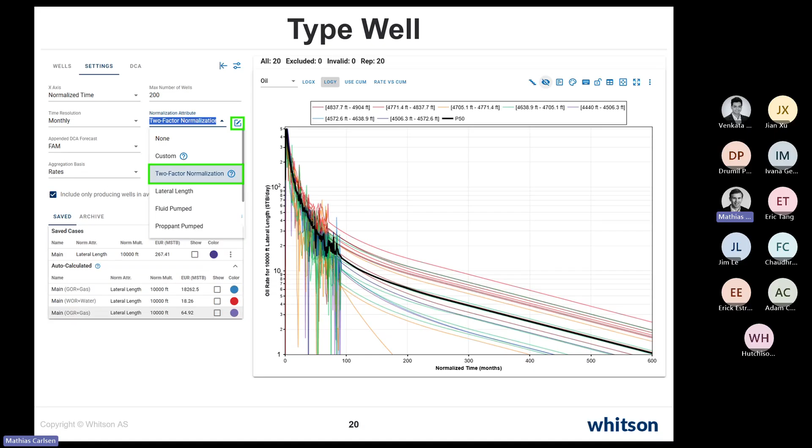And the priorities of the features are just literally, okay, 100 people wanted PNR DCA in the software, well, then that's going to be prioritized versus a thing that was requested by one person. Very simple. So over to some news. It's been a very, very big year for us. We've doubled the development team across all our products, actually. And on the Whitson Plus side of things, we've continued to enhance the features that all of you use and love today, whether it's type well or comparison plot.

Comparison plot is a great example of a feature that's probably 10 times better than last year, where you now can integrate a GIS plot. You can add forecasts from PNR DCA or regular DCA. You can do aggregation, averaging, etc. And now, as of late, also cross plots, bar charts, etc. Also on the newer front, we've added in basically merged GIS and filtering.

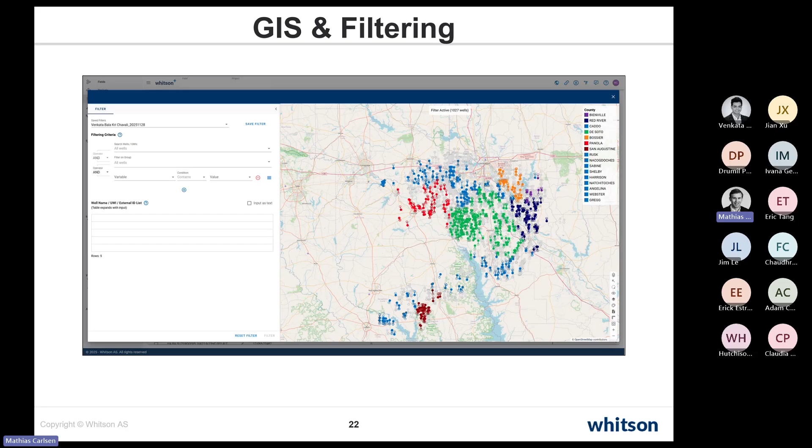There's kind of a joke in the software space that every software in North America starts with a map. I don't know if you guys have heard this, but people are very spatially aware, and a lot of the problems are kind of linked to things spatially. So to be able to filter on all kinds of parameters, whether that's well attributes or physical attributes or custom attributes, and also do that spatially, is something that we've doubled down on the last year.

Forecast Manager. It's so fun. If you haven't used it, take like 16 wells at a time there, and just spray gun fit the forecast with whatever you want to configure.

I'm trying to teach my 6-month-old son this. He's getting there, but he still needs to work on the setting.

But it's addictive. And associated with that, you can compare forecasts, statistics related to the forecast, and filter to forecasts that you're like, oh, these probably look a little suspicious. I compare the forecast from last quarter with these ones, and the EUR or cum 5 years are a little bit different. Let me double click and view those.

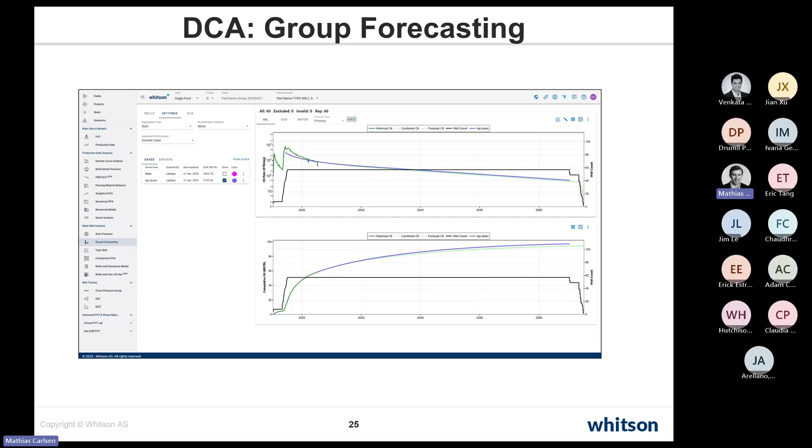Also, group forecasting. Some people don't like to individually forecast wells and then aggregate them, but just aggregate them at once and bulk forecast that one stream. Totally fine to do, and that also is a capability we've added into the product in the last few years.

I'm going to double click a little bit on something called PNR DCA. We had a webinar on it last year. Most popular webinar we ever had in terms of actually triggering feature requests. I had a list in my Excel sheet, and it counted over 350 people requesting to get that into the software. And then I was, okay, probably we should go in and get it into the product. And if you haven't heard about what it is before, I'm going to kind of dumb it down and teach you in a couple of seconds before I get Jennifer on the stage.

So what PNR DCA is, if you want a simple way to think about it, it's just pressure-normalized rate, so a secondary way to forecast your wells in addition to decline curves. It was popularized after this webinar that Oxy did, and it has actually been in the literature the last 10, 15 years, proposed by multiple different co-authors, and it's simply just accounting for flowing bottom hole pressures or normalizing your rates for that.

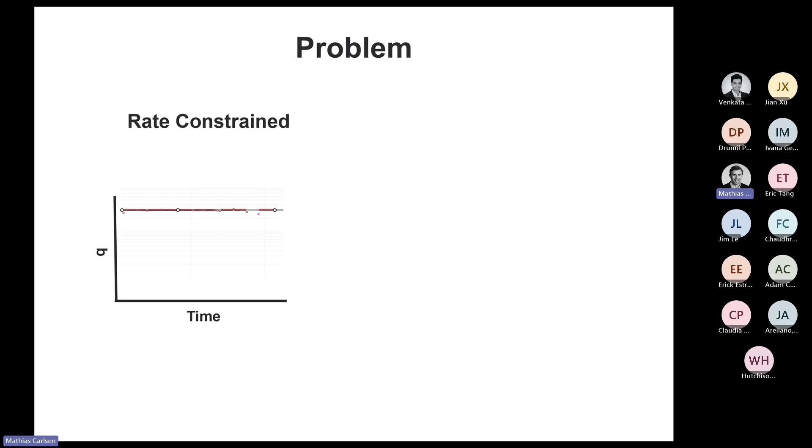So the problem, to address it very simply, let's say you have rate-constrained wells and you need to forecast, what do you do? And that's where PNR DCA comes into play. So you just combine your rates versus time and your delta P versus time.

You pressure normalize those rates and you multiply them in this case with like a fixed delta P, and you can plot that versus either time or versus cum, which is kind of the industry standard now, to get an early time EUR. And just to give you an example of a data set we got a couple of days ago, this is actually 16 days of flowback data, so it looks like a lot of data, but it's actually not many days. It has an inclining period and a flat period.

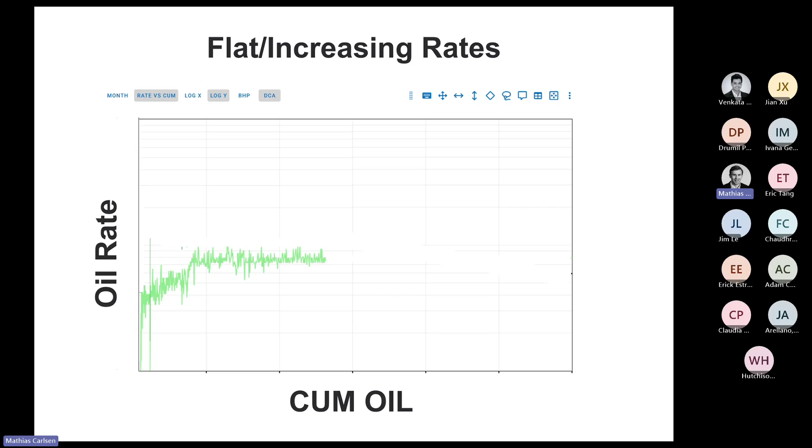If you went in here with unconstrained B factors, the best fit would be a B factor of 10. So that's a constant, it's a flat line. Okay, so you can't forecast this guy. With PNR DCA, you start to get the declining rates from day one, and an early way to go in and forecast your wells in those situations where that matters.

Okay, over at today's program, we're going to have a technical session. It's going to nerd out. We have a lot of petroleum engineering junkies in the room. I see you. You know, some of you were like looking at the equations at lunch. That was more fun than talking to your colleagues. I'm the same way. So hopefully, if we visit your office, or maybe if I visit your home at some point and I see that in the bedrooms of your children or something, then we reached our goal with the posters.

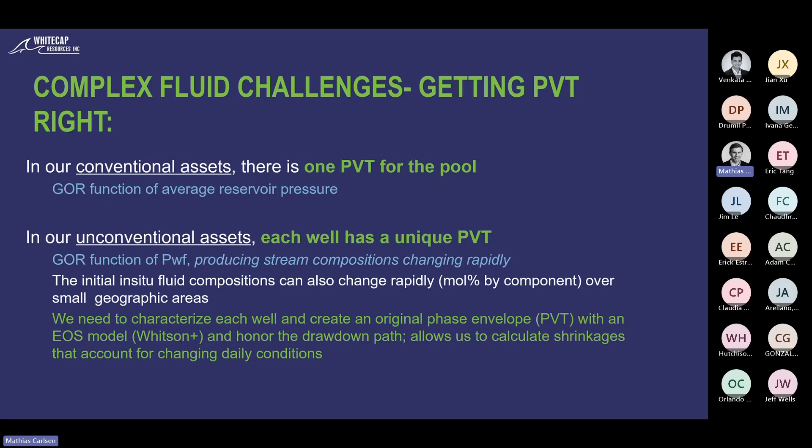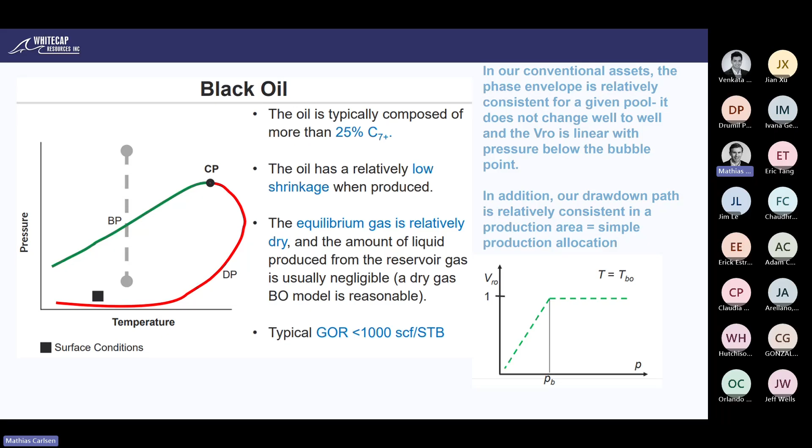So I'm not going to spend a lot of time with these. These are literally straight out of the Whitson training on PVT, but essentially just highlighting, black oil is pretty simple. And often when you've worked conventional assets, a lot of times they're pumped off very, very early time. So it's very simple in terms of trying to characterize and allocate production. When you get into your volatile oils, it becomes more critical to, again, correctly define that phase envelope so that you can get the correct bubble point pressure.

The drawdown path on these wells, because they're so big, often the drawdown paths can be different well to well or pad to pad. And then once you drop below that bubble point, you have a non-linear relationship between your volume of liquids and your pressure.

And then finally, you get into gas condensate, which is your most complex fluid system. And again, defining that dew point pressure properly is pretty critical, but you also have a phase of condensation and then flipping back into a vaporization phase. And this is where things get really crazy and you start to see these negative shrinkage values, which really make you scratch your head until you stop and really think about what's happening with your fluid system.

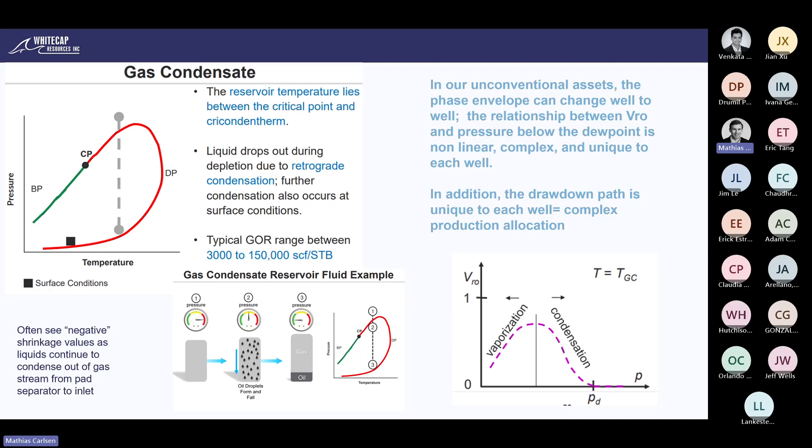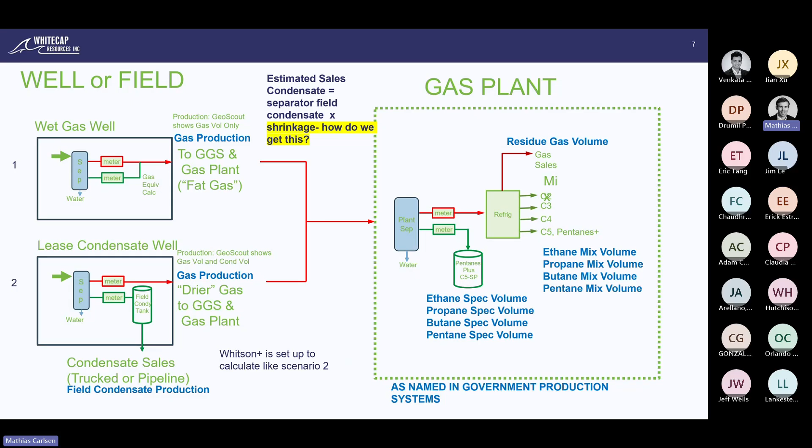So what are the key Whitson tools that you're going to need? So we went, like I said, down quite a rabbit hole and had a lot of help from Whitson trying to understand how to do this in the software. And ultimately, they created a few new exports and calculations for us as well.

But the very first thing, if you want to understand this better for your own wells, is you need to go into the compositional tracking and click on the settings there, and then you want to activate the advanced compositional run. This will give you additional calculations that you don't normally see in Whitson by default. And then the first export is related to understanding the shrinkage of the liquids that you actually have at the separator, so that field condensate component.

And Whitson is pretty cool in that it actually calculates daily. So if you've got your separator pressures and separator temperatures coming in daily, and your liquid rate off that separator, it's calculating based on the EOS what the shrinkage factor is daily based on the pressure and temperature that the separator is operating at that day. So right away, you're getting better resolution on your shrinkage than you would if you were just using one flat value.

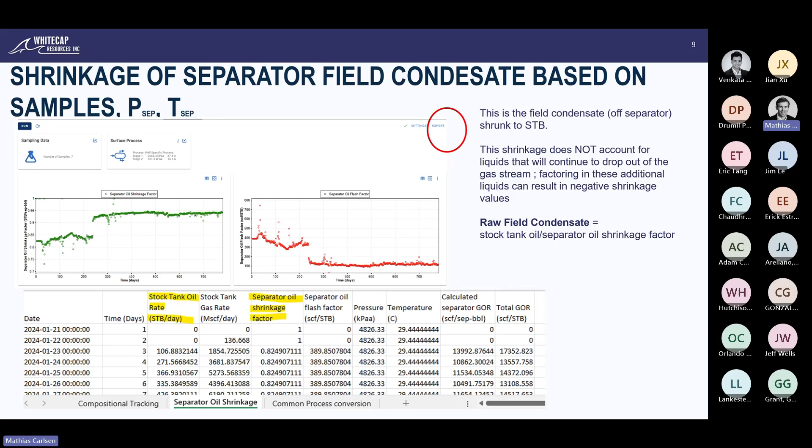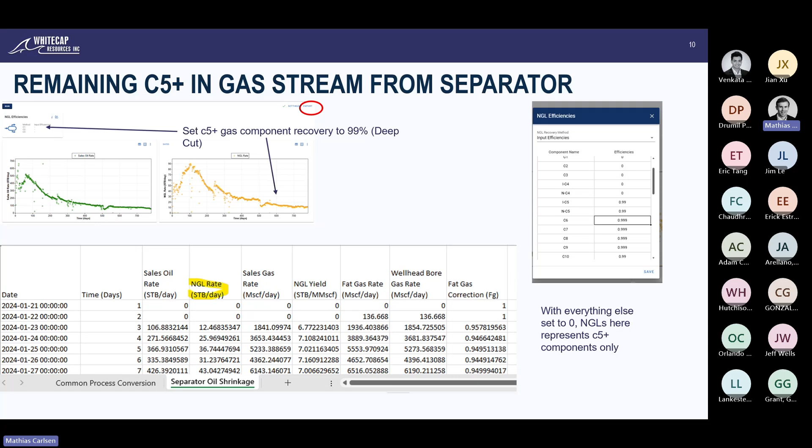And then you need to try to figure out how much liquid is remaining in that gas stream. So to do this, you look at the NGL tab, and you're going to set your NGL efficiencies to basically 99% for your C5 plus components. And so then Whitson again goes through, it uses the samples that you've provided, the pressure and the temperature, what already came out at the separator. And for that gas stream, it calculates the remaining C5 plus component that you should be seeing for that well.

And then as a final step, you need to add those two components together. So you're going to take your field condensate off your separator as a raw number. You're going to add in the C5 plus number, and now you have your total liquids, which you can calculate a shrinkage value from. So it requires a little bit of exporting and spreadsheet work, but you can get there.

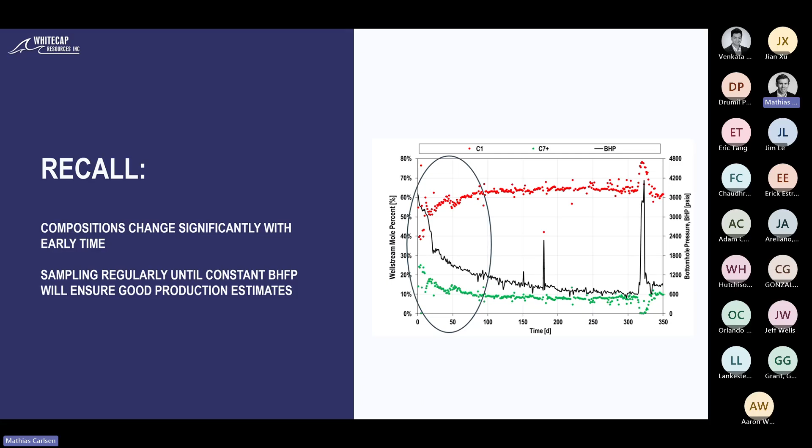The other thing we took a look at was just sampling frequency. So again, recalling that your compositions change very rapidly with early time, and then that can have a big impact on your shrinkage as well. We wanted to take a look at sampling frequency and how much that was actually impacting the production estimates. And so this is another example where we just compared the Whitson forecasts in this case, because we know there's a lot of error with how things are going into our production estimating system.

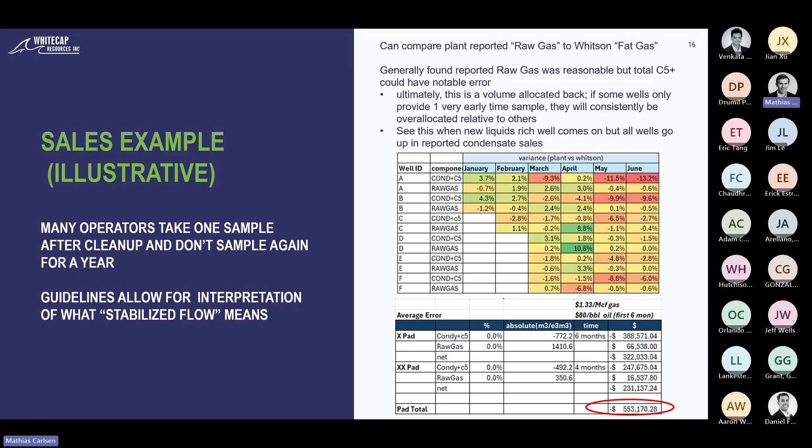And I think what really stands out here again, you want to tie this all back to value. For the 2 pads that we looked at over the course of 5 months on average, the net impact, and we did this for sales and gas, the net impact overall was about $500,000 lost.

So what are the takeaways from all of this? Number one, you have to correctly characterize your wells so that you can do proper shrinkage calculations, get proper well production numbers, and ultimately track and understand if you're getting the revenue stream that you should be from your wells. It's really important that you understand where your data is coming from, what the field processes are, and where the potential for error lies. Error can be introduced through infrequent sampling.

The measurement guidelines are pretty loose. They say that you have to sample until you reach stabilized flow, but there's no real definition of stabilized flow. For a lot of operators, that just means the well's not slugging by the end of the test. Not resampling when production conditions change is another one. When the field flips from a high pressure separator condition to a low pressure separator, that's again a trigger for a resample.

Group separation is obviously a bit of a problem because you lose resolution there as well. And ultimately, even when you do it all right, if other operators at your same plant inlet are not doing it correctly, you're going to have error. Action items we identified within our own organization include increasing sampling. What we do right now, which came through collaboration with Whitson, is we recommend sampling once per month for the first 3 months during the high drawdown phase, then once every 2 months for the next 9 months, and then once a year after that.

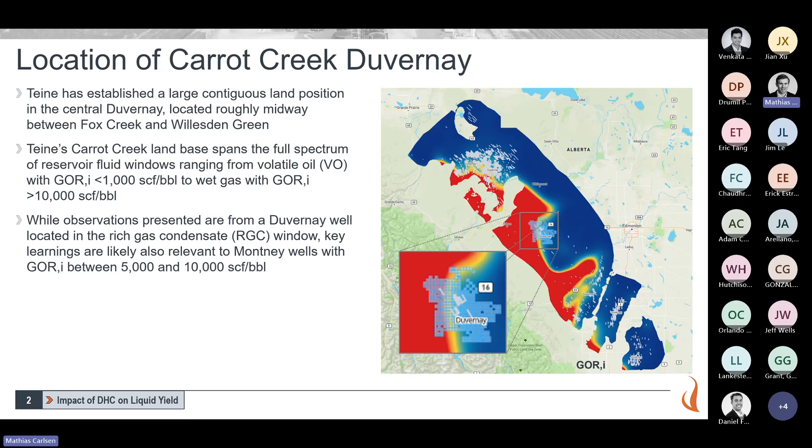And what I want to focus on is a well that's sort of in that 6,000 to 7,000 initial GOR. And I would think that the learnings that we've deduced from what's in this data set are probably also applicable to Montney wells. So maybe something for non-Duvernay operators in here too.

We started using downhole chokes on some of our wells early on just because of the very high pressure differential between wellhead and the separation facilities. Joule-Thomson effect is not a good thing to work with in the winter. And so just run a couple of downhole chokes, mitigate all those operability issues, and just take that cooling effect down at reservoir temperature rather than at ambient.

And so we were working on a step-out pad. So this is a single well. It's got its own dedicated separator by that extension. And so any of the changes we made were very much trackable at the sales terminal. There's no proration issues. There's no sampling issues. So this is very clean data. And I think that's the only reason why we caught this.

I'm going to get into this chart in a bit more detail on the next slide, but essentially my color coding throughout will be: red is the separator gas stream. The green are separator liquids. Black throughout is tubing pressure. The golden is casing pressure. Showing on the split graph below is my separator pressure in gray, and then my separation temperature in purple. And then that dashed line is essentially where things are starting to freeze off on us.

We initially ran into this well with an 18/64 downhole choke. We thought we were in the volatile oil window. It's a step out, got to equip it with something. And then found out, of course, it's a retrograde gas. So the completely oversized choke really didn't do anything. And I think that's important. We did pull that choke after about 8 months.

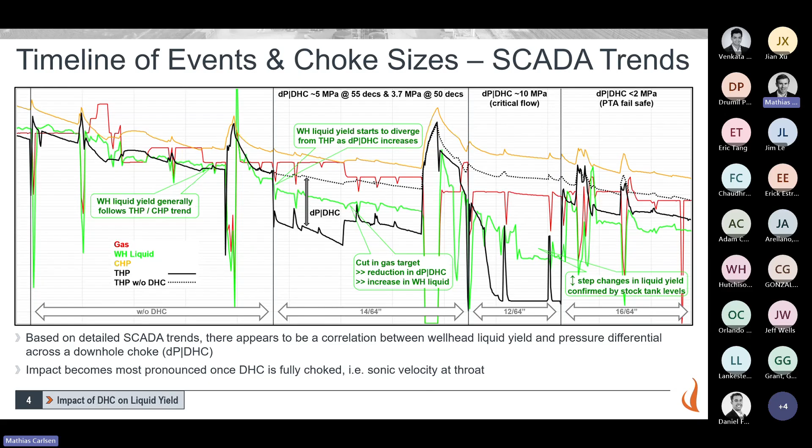Looking at the stock tank level, here's a type curve for this well. It's very well behaved. When there is sub 1 MPa pressure loss with that 18/64, your 7-day average on this well is trending slightly above type, slightly better above type once there's no pressure loss at all. So that goes along with that correlation. As we're starting to draw 3 to 5 MPa with the 14/64, we're starting to be more or less on type, so it's a negative impact. And then once we run the 12/64, the wheels kind of fall off the bus, right? And then we pull it, and then we're back onto trend.

Focusing just into that pink box here, the 2-week average leading into this was essentially 16.3 cubes a day of condensate at an average gas of 45 decs. During the period when that 12/64 was fully choked, we dropped to about 11.9 cubes at 44 decs, so a comparable gas rate, but about a 30% change in yield. And then conversely, once we pulled that choke, we increased to about 17.5. So it looks like when we're at sonic condition in that downhole choke, we lost or gained on the order of 30% of our wellhead liquid yield.

And that's very significant. This well is a ways down the depletion curve. We're talking about 35 barrels a day. If this happens while your well is making 100 cubes of oil, that's a very significant loss of income. And so the question really becomes, where did those liquids go?

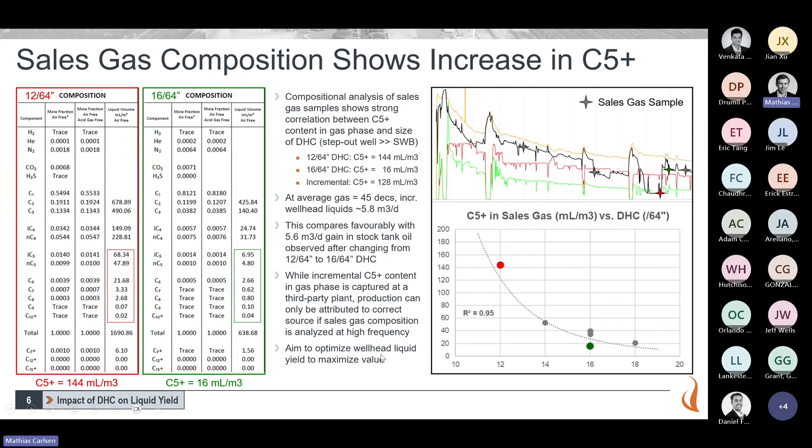Now, they were nice enough to actually agree with this presentation here and have credited us back in the meantime, but I think it goes back to you've got to really be on top of your gas wells because they will change radically if you at all approach sonic conditions on a choke. And so really, I think if you want to optimize your value, just keep your condensate on your tank, know what your downhole choke is doing.

And so at that point, I kind of took over to the Whitson side. First, what did Curtis think of this? So back in 2012, Curtis Whitson published a paper, and it demonstrates a very close correlation between the wellhead liquid yield, which he called OGR in his paper, and P well flowing, which is essentially this black curve here, but essentially black and blue are tracking each other. This is in a log time scale.

But the takeaway was, and this is a quote from the paper, the producing OGR tracks closely the FBHP, a fundamental characteristic of all liquid-rich shale wells we have studied. And so that dependence of wellhead liquid yield on FBHP is nothing new. This is well established, and our current example is no exception to that at all.

So what I'm showing here is essentially the flowing bottom hole pressure in black, that is Woldesemayat and Ghajar from Whitson, and then the measured bottom hole pressure for our gauges in gray until we pulled those. We ran a second set of gauges, so we pulled those again; the latest set of data I have is when we switched from the 12 to the 16. We still have gauges in the hole.

And so the OGR from actual tank sales very much overlays that correlation, right? Until we reach the point where we're at the 10-ish MPa differential, where we have essentially this unknown deviation from the trend. And so at 18.5 MPa, which was our confirmed flowing bottom hole pressure and also predicted, very good agreement there.

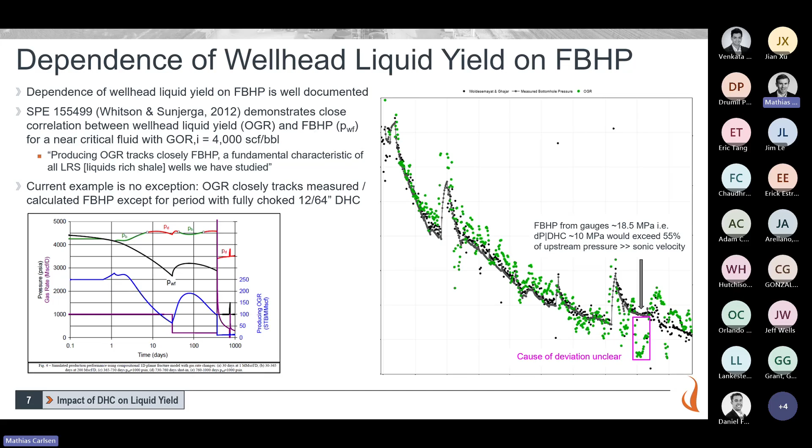I ballpark that dP DHC at about 10 MPa. It's probably more like 9.5 because 10 MPa would be, I think, 58% of the upstream pressure. You can't do that. At about 52 to 55%, depending on ideal gas and deviation from that, you go sonic. So it's confirmation, however, that we've got a sonic condition at the throat, and importantly, shock waves downstream of the throat. And we'll get to that in a second.

What does that mean? And so I've struggled with this for a long time. What is the dependence of wellhead liquid yield on PVT path? Because it's real. And so this is based on Core Lab's measurements of the PVT analysis that we've done on this well. This is the phase envelope they generated based on the tuned EOS.

And so we can kind of play this game where we say, okay, here's reservoir temperature, here's reservoir pressure, and we're taking this well down to where we had measured about an 18.5 MPa flowing bottom hole pressure. This is real. This is where we're sitting. And we then run a downhole choke, which takes something like 9.5 MPa downhole. It's pretty well isothermal because it's an unlimited heat sink down there. So the cooling effect doesn't really occur.

And after that, we're taking some amount of pressure loss on the way up the tubing to the separator. And essentially, it says that we will stay somewhere between the 15 and 20% liquid yield at all times.

If at that point we pull the downhole choke, we take that 9.5 MPa at surface across our wellhead choke, then we will obviously have our decrease in the pressure on the way up the tubing. We get into something like 45% liquid immediately upstream of the wellhead choke, and then we take that 10 MPa and it takes us back to the separator at the same condition. Why are they different?

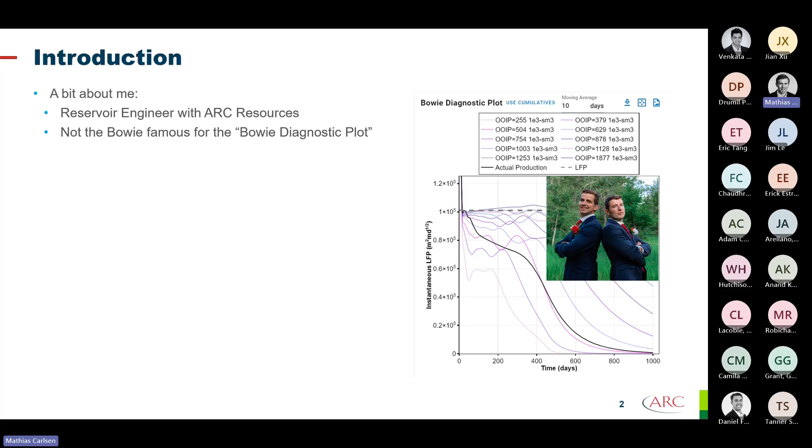A little bit about ARC. We're a Canadian oil and gas producer, almost exclusively producing from Montney assets, approximately 410,000 BOE per day of production. And a little bit about this presentation. I'm going to start with what is a PAS file, then how you can use PAS files in Whitson Plus, and finally why you might want to do that.

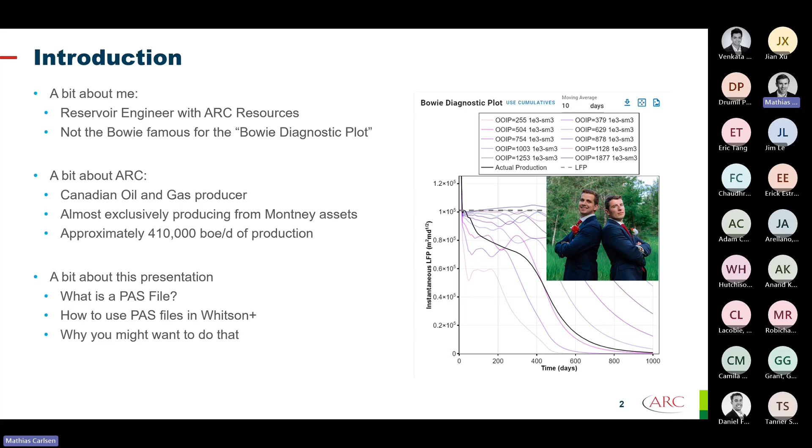So first off, what is a PAS file? PAS stands for Pressure ASCII Standard. So as you can tell, it's a file designed to store pressure data. It's an ASCII file, which means it's just text. You can open it up and read it. And it's a standard that's maintained by the Alberta Energy Regulator and the BC Energy Regulator.

There are many types of PAS file. There's GAN, OAN, and WAN files for gas analysis, oil analysis, water analysis. DST files for drill stem tests. GRDs store static and flowing gradient data.

Then you have TRGs for transient gauge data, such as buildups, AOFs, DFITs, etc. And then finally, you have PRD, which is production data, which is basically just for flow tests. And so right now, Whitson supports direct import of PRD PAS files. So that's what I'm going to be focusing on here.

And so you're probably thinking right now, why should I care about this text file format that the government mandates? How does this actually affect the work that I'm doing day to day? And so the convenient thing here is that because reporting your results in PAS format is mandatory, anytime you do a flow test, you need to be reporting that to the government in PAS format. That means that if you go into your well files, you've already got your flowback data formatted and ready to go. So there's no manipulation of your data, massaging it, getting the columns right to import into Whitson Plus. It is ready to go.

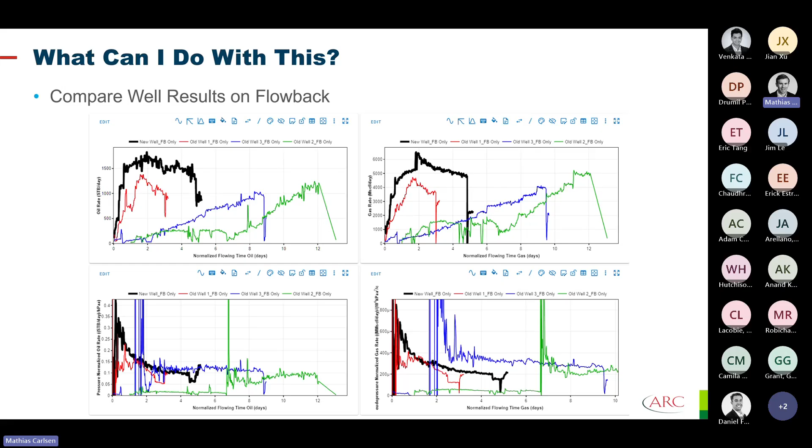Now you might be saying, I guess that's sort of interesting, but maybe we already have our flowback data in a unified, easy to query database that's already flowing directly into Whitson, so loading a PAS file easily doesn't help me. Or maybe you say, initial pressures are interesting, but we gather tons of DFITs, we do buildups all the time, we can estimate initial pressure on lots of our wells.

Or maybe you say, we don't focus on flowback data because our management is extremely patient. They understand when a new well is coming on, the long-term production is what matters. Looking at the first couple hours of a well is not indicating anything. So I say, especially to that last one, I am jealous if you're saying that.

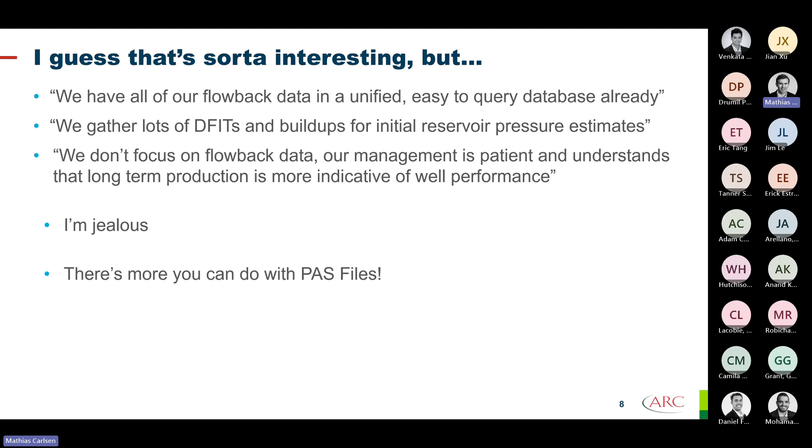But at this point, there's still a lot more you can do with these PAS files, because the best part, kind of given away by the title of the talk, is that all of this data is publicly available. This is not an internal proprietary data set. So say I've got ARC land in yellow here, and let's say Whitecap drills a pad right next to us. So I can go into GeoScout, and if I wait a couple months, I can open up the production.

Because of the sales volumes, I can see the gas and sales condensate volumes. I don't see pressures. That's pretty critical because we know that looking at rates alone without pressures doesn't really tell you much about a well. But I can also in GeoScout go in, look at the QFind documents, and boom, there's the PAS file. Just download that, upload it, and into Whitson.

The deviated survey, that's also public data. The casing design, that's public data. I can't see tubing, but during flowback, most wells are just flowing up casing. So I can calculate bottom hole pressure there. And now if I want to compare this against an adjacent ARC pad, say my manager's saying, Whitecap's doing something different, how is that affecting their wells? I can get an initial estimate here.

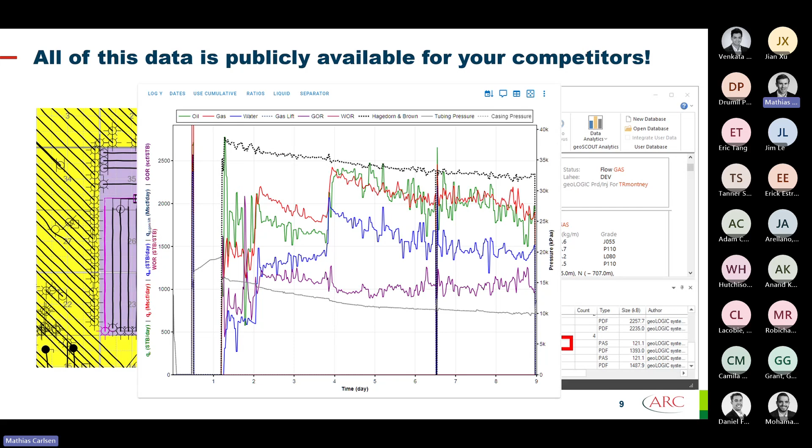It's only for the first week or so, but every once in a while you get someone who, for some reason, I'm sure there's good reasons for it, ends up flow testing a well for 2.5 months or something. And now I can download that data. This is a relevant well, upload it. I now have 2.5 months of hourly pressure and rate data. Now I get a chance to use my favorite diagnostic plot, plot it up, put my flat line on here. I can estimate an LFP.

Now I can directly compare that to our wells for more than just a week. And I can normalize that for tonnage, fluid, length, all that's public data in Canada too. So we can now really peek over the fence, really get an idea of what's going on with our competitors' wells.

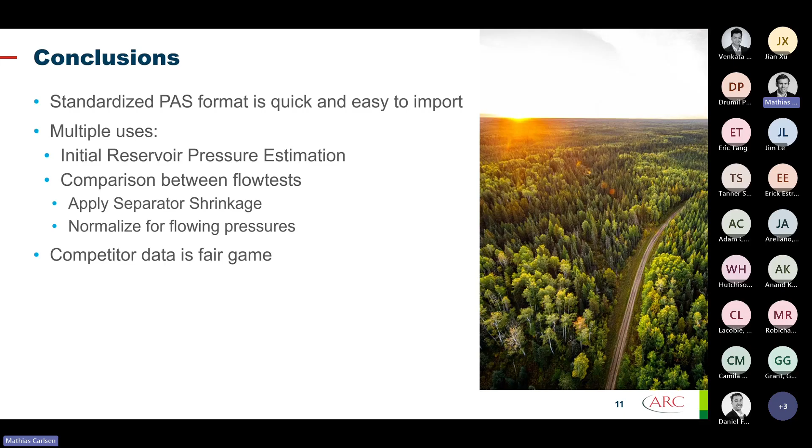So in conclusion, because of the standardized PAS format that the government requires us to submit all of our flow tests in, it's quick and easy to import into Whitson. There's a lot of different ways we can use this data. We can do initial reservoir pressure estimation, comparison between flow tests, accounting for separator shrinkage, and flowing pressure changes. And then all of the competitor data is fair game. This is not just for your wells, this is for everybody's wells. So just one more reason living in Canada is the best.

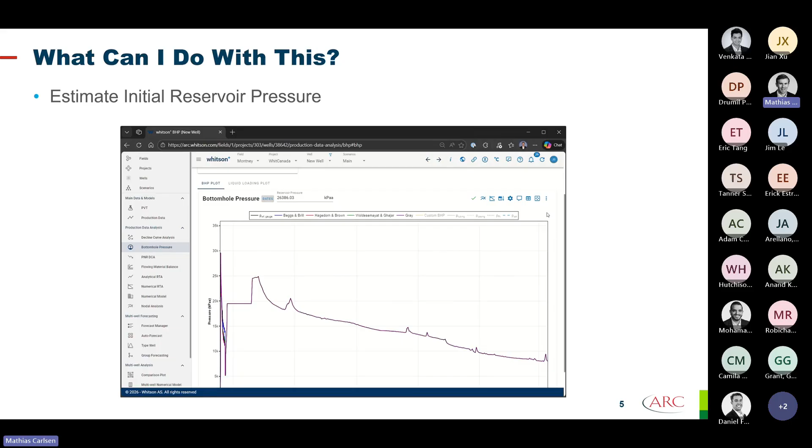Another question? Maybe we should try to move this guy around. Maybe people will come. Yeah. This is a shameless plug. Okay.

Dave Sorkamo with ARC. I think I was in Jordan's office and we were talking about this: wouldn't it be great to get PAS files into Whitson? So Jordan that afternoon sent off an email, and I think it was maybe within 5 days or less that, boom, we could upload PAS files. So I appreciate that. Oh, your beer.

Actually, question to Jordan while I walk over there for that question. Is there any of those other standard formats that would be valuable for us to support, or are they just not as interesting? So I would definitely like the ability to drop in the GAN, OAN, and WAN files, because we have our initial samples right now. Generally, there's all the different ways to initialize your PVT. We usually tend to do just GOR and API because it's simple, and because maybe that's a point-in-time sample, it's hard to say how representative that is.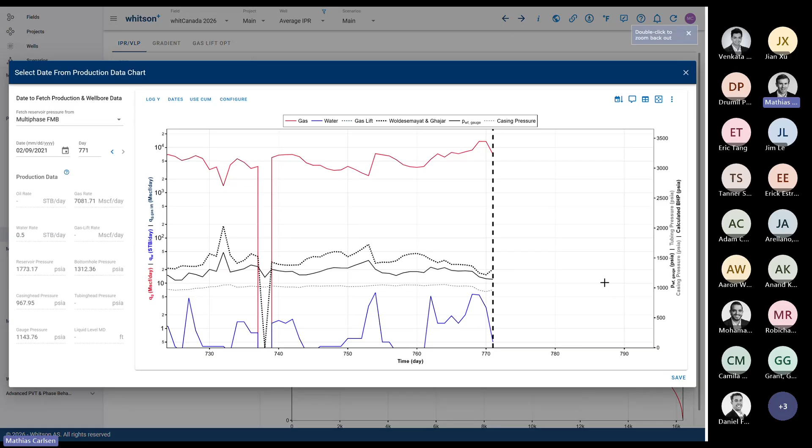Okay, so one of the things is this idea called average IPR. When we create a snapshot of the well's rate and pressure today, we can recreate those conditions. But is today's rate and today's drawdown really representative of the well's typical performance? Because we're just sampling the most recent day, and if the well is having a great day or a bad day, it could really misrepresent the well's productivity.

And so one of the ways we deal with that is we say, well, let's show what the most recent 10 days of rate and pressure look like, because if you picked the best day in the last 10 days, you get this really optimistic IPR. If you pick the worst day, you get this kind of bad IPR. So this is exposing the danger of just picking one day to represent the well's productivity, and the range of what those IPRs could ultimately look like. And this could really over or underestimate the response if you change the drawdown on the well.

So the way we've tried to solve this for you is to say, okay, give me my average IPR. And this will do exactly that. And you can change which period you want to sample it over here, right? Create the average among a few different points. So what this really means for you is you're going to get a more representative IPR, even if the well rates are jumping around.

Now, if you happen to have a bunch of wells and you want to do that in a bulk mode, you can go ahead and create an average IPR for all my wells, and pick over what time period you want it to make the average from. So ultimately, this is really just to make your IPR more reliable and more representative of the well's productivity, all right? The next thing is this whole idea of bulk running sensitivity.

So if you have a bunch of wells and you say, what would happen if I lowered the well pressure by 100 pounds on all the wells? Or if I increased the gas lift rate by 100,000 cubic feet per day on all the wells? To do that manually with different VLPs would be quite a time-consuming process. So with this bulk run idea, you can say, okay, I want to lower my wellhead pressure by 100 psi, and I want to make it a nice color for the VLP.

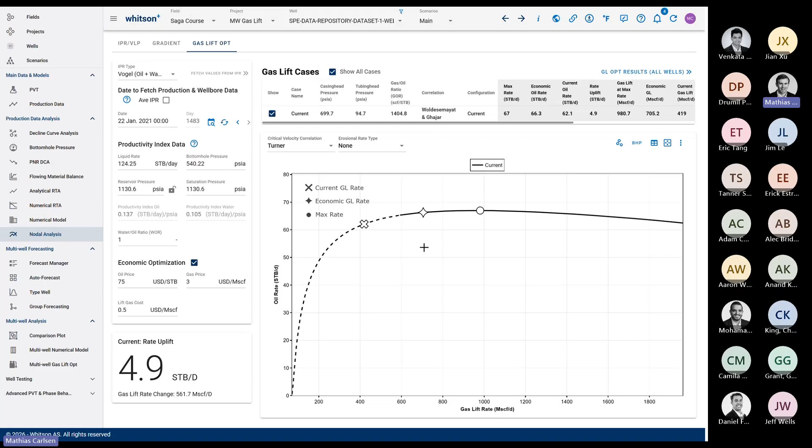Now, once you've done a bunch of gas lift curves for all your wells, you may want to start ranking them: which well is going to be the most responsive to a gas lift rate change. If anyone uses these results, you might have used it for reporting which wells are liquid loaded, right? But you can also start reporting which wells are going to respond the most to a gas lift rate change. These are the current oil rates the wells are producing at and the current amount of gas lift they're receiving. But what we really want to show is the uplift that we can get.

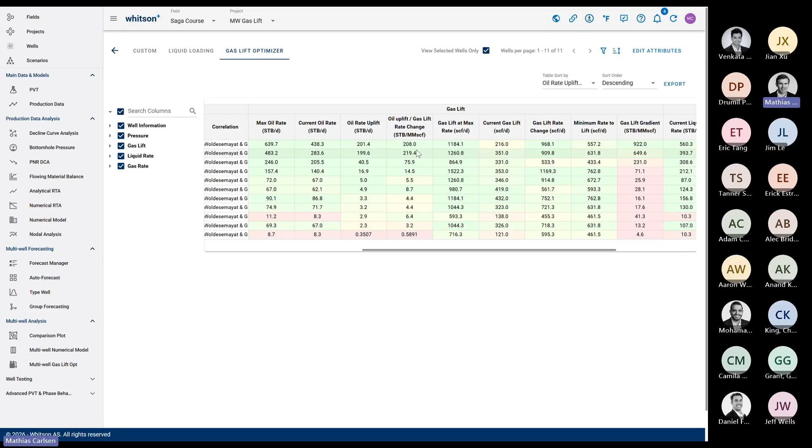So let's see, oil rate uplift. This is basically showing that the well's currently at 400 barrels a day, but we could increase it by 200 barrels per day if we went to the peak of that gas lift curve for that particular well, and how much extra gas lift we would need to inject to see an extra 200 barrels a day. So really, this is just ranking the wells based on how much reservoir rate response they could get. Some wells have very low opportunity. Some wells have higher opportunity.

Now, this is assuming you have infinite gas supply to add more lift to all the wells. But the next thing we would want to do is to say, how do we distribute a limited supply of gas lift? When we have many wells that share a common gas lift supply, I want to know how to best distribute the gas lift for the highest liquid rate. This came in about a year ago, and the whole idea is you pick a group of wells that are sharing a gas lift supply. In this case, they have 3.4 million of gas lift to share among multiple wells. And we say, tell me how to distribute that gas lift.

What we're seeing is that the current oil rate these wells are producing, when you add it all together, is about 1,400 barrels a day. These wells are getting 3.3 million cubic feet of gas lift today, and this is how much each well is getting. But what if we redistributed how much gas lift those wells are getting, honoring the total supply that's available? So for this well, we're injecting 216. If we went up to 600, this particular well would see a 160 barrel a day rate response.

Now, because we have to keep the total supply of gas lift the same, some of these wells are actually going to see a reduced rate, because we have to take some of their gas and give it to wells that are going to respond better to it. So ultimately, this is really just this multi-well gas lift distribution. Now, a few companies have really taken this very far in the last year, where they are using weekly data, the field conditions, bringing it in here, and assigning the optimized gas lift rates out to the field to keep all the wells in their sweet spot.

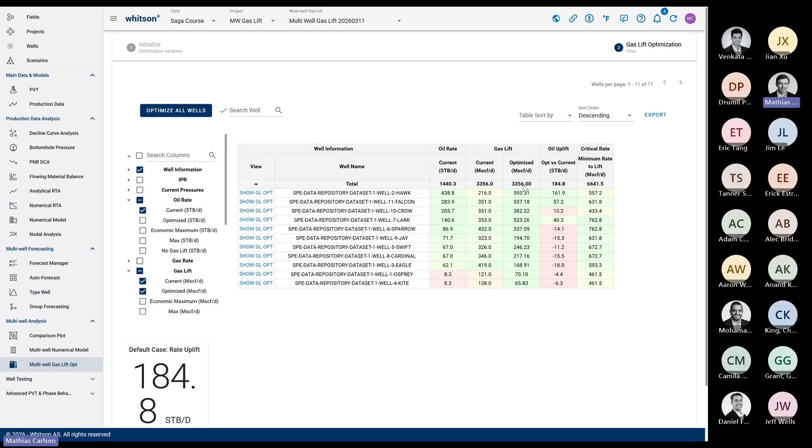And so we're even writing a paper with Devin this year for URTeC. So I'm sure we're going to have a WhitCon or some webinars about them utilizing this. I think for gas lift people, this is solving a lot of problems where you have to manually do this iteration, and it's pretty painful. So this has been one of the big changes in the last year.

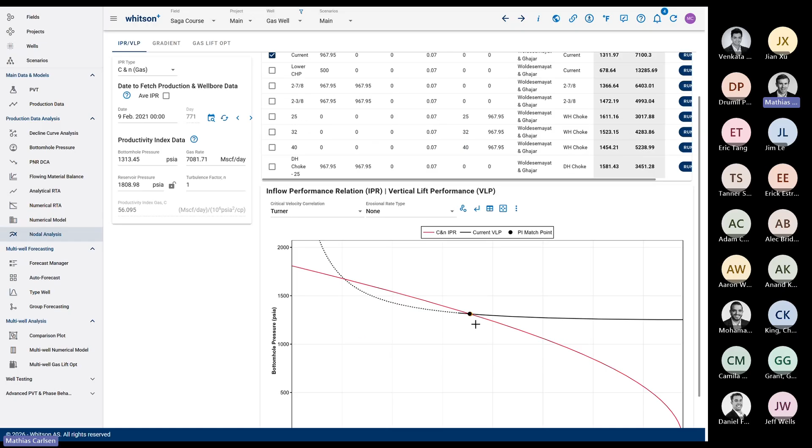Okay, chokes. All right, we had a good choke talk earlier today. So again, a lot of people don't know you can do this in Whitson. So this is a well that's flowing up casing, and if we installed some 2 7/8 inch tubing, we're going to get a little bit of friction. We're going to back out the well a little bit, but we delay liquid loading.

Now, what if we installed a large wellhead choke? Okay, 40/64ths, a smaller choke, a smaller choke. So these are all wellhead chokes to try to plan to see what the rate's going to be. Or what if we put a 25/64ths wellhead choke in versus a downhole choke? So you can start to compare wellhead choke versus downhole choke. What will that mean for your rate?

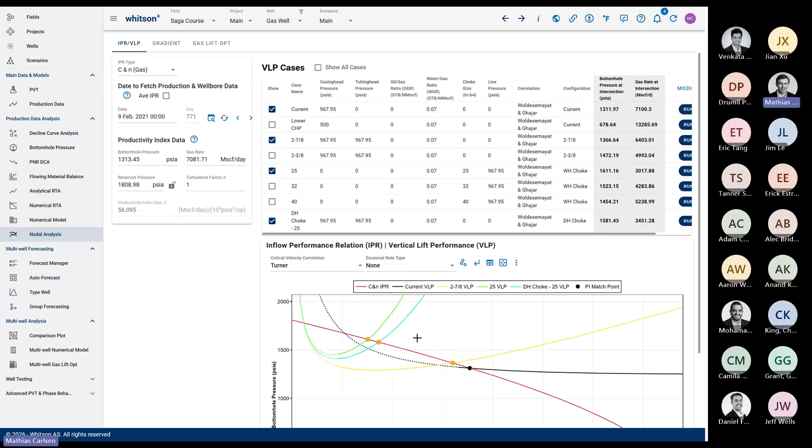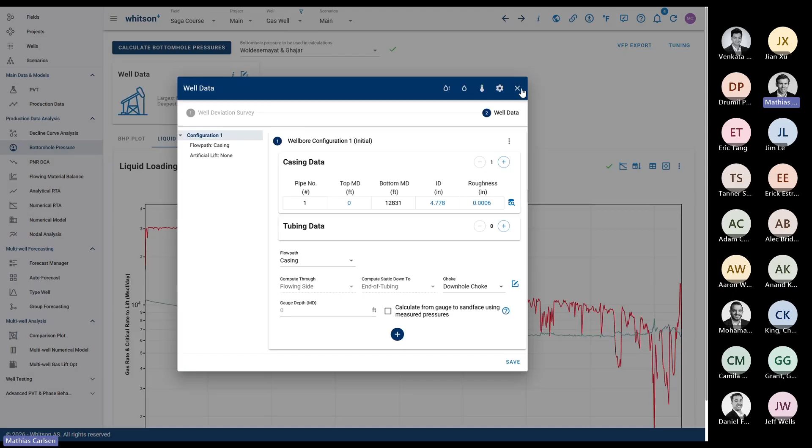All right. Now with downhole chokes, they've historically been a bit of a problem because if you have a packer in the well, how do you calculate the daily bottom hole pressure with a downhole choke? It's really tough. And so that's something you can actually do right now. So when you're describing your historical wellbore, you can say what size the downhole choke was through time, and ultimately take your tubing pressure through the choke to get the bottom hole flowing pressure. So even for downhole choke wells, this is a big deal. It's kind of a pain point I had in my past career trying to get those bottom hole pressures with downhole chokes.

Does anyone use jet pump here? No? All right, we'll skip that.

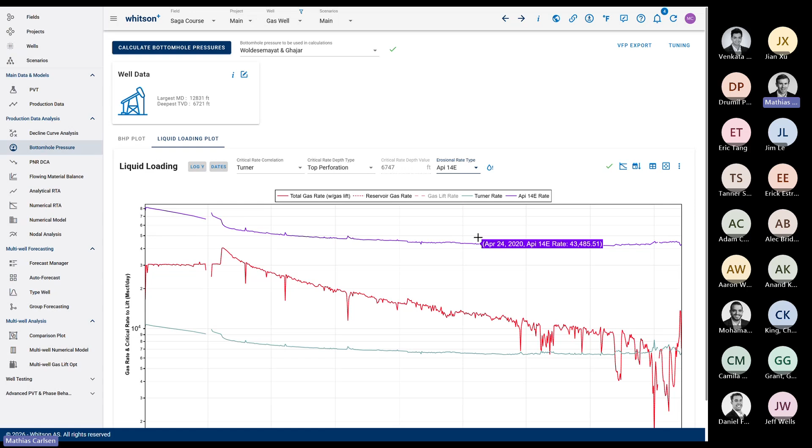So, erosion, this is a good problem to have, is that you've got such a high rate well, you have to worry about erosional issues. And so what you can do now is basically the red rate is the actual gas rate. This is our Turner or Coleman liquid loading rate that we need. But now you can also see what your erosional rate is, and if you've exceeded it, if you're getting close to it. So this is again a big deal if you just want to do some quick checks about if you're getting close to that erosional rate for your well.

Okay, plunger lift or GAPL and things like this. So part of the issue with plunger lift is it's intermittent, and the well's not always flowing. And so how do you calculate the bottom hole pressure for a well where you have a plunger in the well? So what we do now is you can put in how long the well is open during a cycle, how long it's shut in, and how long it takes for the plunger to travel. So what this does is it takes the cumulative production for the day, and it tries to convert it into the instantaneous rate during the plunger's rise cycle.

And so again, we think while the plunger is rising, that's the closest thing that we have to natural flow for the well. So we take those conditions and that instantaneous rate to calculate the historical bottom hole flowing pressure. So this isn't really here to optimize your plunger lift plan. It's really just to get a better bottom hole flowing pressure for wells that are on plunger lift, okay, or GAPL.

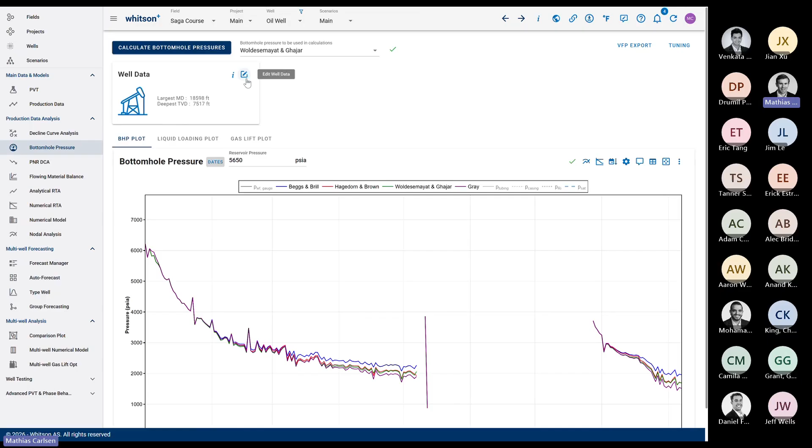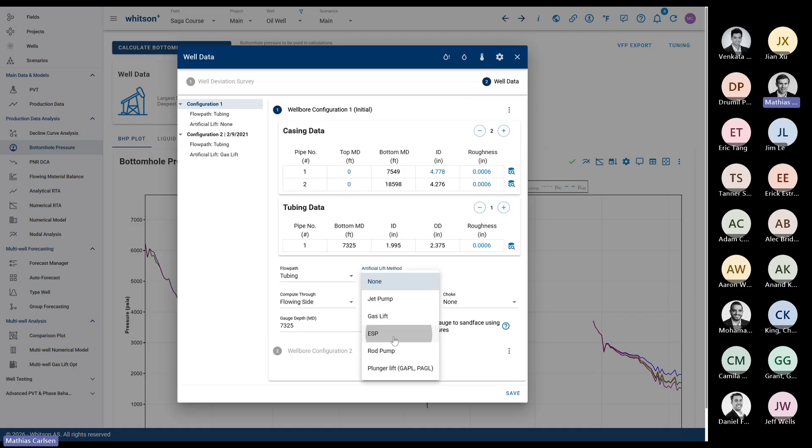ESPs, okay. So most people who have ESPs have a pressure sensor on the pump inlet, right? But for people who don't have that, it can be nice if you could calculate the pressure through the ESP. And what we've added is about 600 different ESP models in here now. So if you pick your ESP model, you can put a couple details about the ESP in here, and it'll basically use the surface pressure, calculate through the ESP to get the bottom hole flowing pressure.

So this is useful for two reasons: getting the bottom hole flowing pressure when you don't have a gauge at the bottom of the ESP, or if you're considering changing your ESP to a different model, you can pick it here and see how that new rate would be on your IPR curve. Okay, so this has been pretty handy for people who do ESPs.

I think we went through those really quickly here, but again, all of these developments are really from you, and hopefully it's kind of been like the flashlight moment where, oh, okay, I don't need that flashlight app on my phone anymore, right?

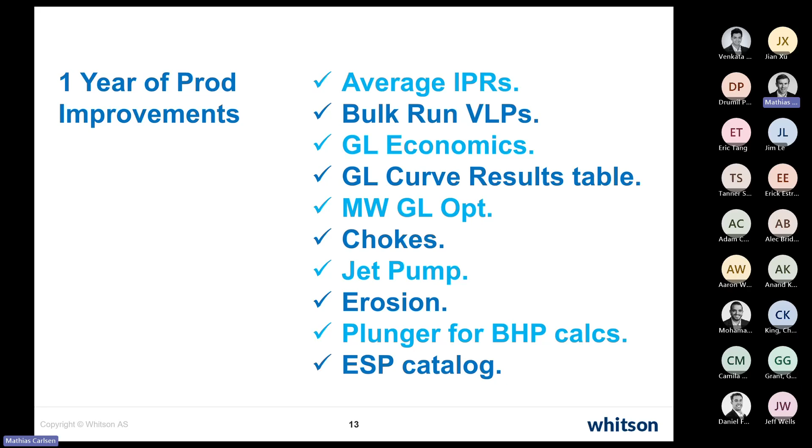There's something that's actually built into my iPhone, or in this case, Whitson. Mathias said we hired a lot of people in the last year, and a lot of them are software developers. Now you might be saying, okay, what's coming next? Okay, fine, I'll show you.

So one of the difficult things with production engineering is these IPRs. They're just a moment in time, right? They're a snapshot of today. And if we're going to do some sort of change with our wellbore, we want to know what is the 6-month cumulative improvement or the 1-year cum going to be from that wellbore change.

Okay, that's something that's historically required a really complex numerical model. I need to make a numerical model to predict that, and we're trying to come up with a way that's a lot more efficient and approachable for production engineers, because I don't really know many production engineers who want to mess around with rel perm curves and all this stuff, right?

So one of the ideas that we're working on right now is kind of a physics and empirical way to predict future productivity of the well. And so there's 2 steps. On the material balance side, we're going to define the size of the reservoir or size of the tank. And that can either come from your flowing material balance or just a volumetric tank size, right? You can choose how you want to define the tank size.

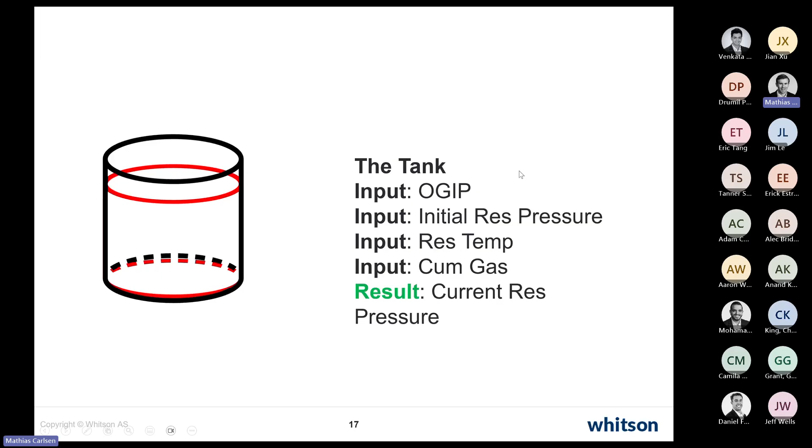We say how much has the well cumed so far, and that will estimate what the current reservoir pressure is for the well, right? So original fluids in place minus the cum, we get our current reservoir pressure. So we take that current reservoir pressure, and the way we represent the well's productivity is saying what's the current drawdown, the current rate. That's like a snapshot of today.

And so we basically create an IPR VLP curve for how the well is operating today using the current reservoir pressure. So the idea here is we're going to forecast the well for 1 month at this rate. After 1 month of production, we can subtract what that cum would be at this rate, and watch the red line. We can calculate the new lower reservoir pressure with 1 month at that rate, right? Just material balance, how much have we cumed at that rate? So now we have a new reservoir pressure and we have a new operating point.

So this is just the material balance topic, but this will let us produce a rate forecast for the well. And the cool thing about this is it's a pressure sensitive decline. So if you decide to schedule any sort of wellbore change, drawdown change, artificial lift change, we're going to predict what the rate response is as part of this forecast, because there's an IPR in the background of all this and a material balance tank. So that's really solving one problem, just the material balance part of it.

But you're thinking, well, Graham, I don't have boundary dominated flow. And these IPRs, if you want to assume a constant productivity, that's really only true in boundary dominated flow. So when we have these long transient flows, we need to tackle the topic of the shape of the IPR changing as the well's transient continues, as the productivity keeps changing. And so who here uses PNR, or has dabbled in pressure normalized rate a little bit? Okay. So PNR is kind of like a version of productivity through time.

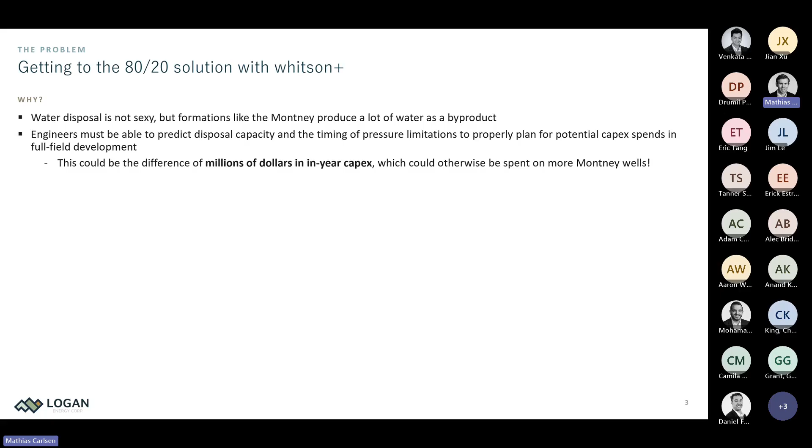So how do you do this with limited time and human resources? At Logan, we're a small company, so we don't have access to expensive software, we don't have access to full-blown 3D reservoir simulators, and we want to come up with quick and actionable decisions. There's so much to do, so we want to come up with something quick and simple.

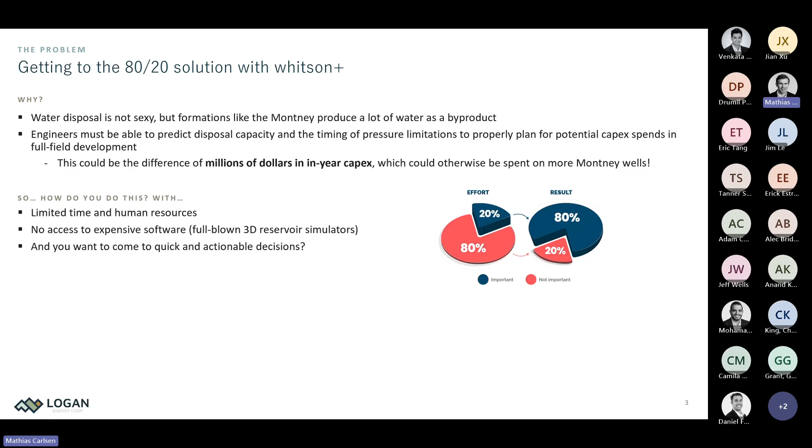Luckily, Whitson started building this out for water disposal modeling last year. It's a bolt-on to the numerical model. And as Mathias has mentioned, there's been a lot of improvements through time. Initially, it was for vertical wells at 100% water saturation. Later, they added in horizontal disposal modeling. And after that, they added in the ability to add gas saturation and skin, which I'll talk about. Also new is the PTA module that they've added. So it's starting to be a one-stop shop there.

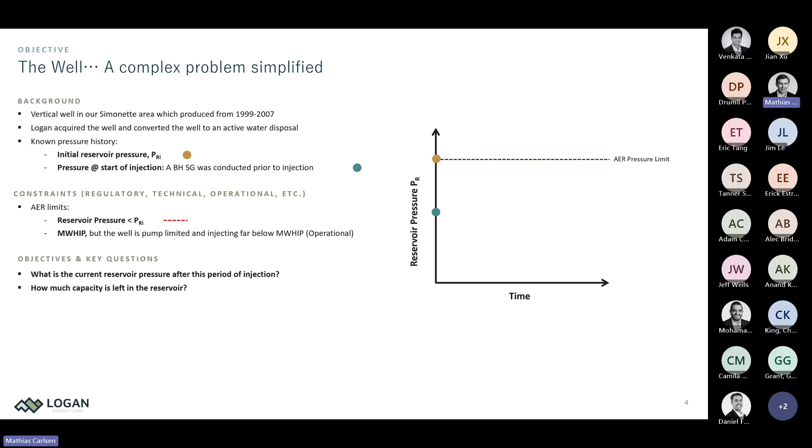So some of the objectives and key questions that we have are, what is the current reservoir pressure after this period of injection? And by extension, how much capacity is remaining in the reservoir? If there is significant capacity, if it's not a technical constraint, can capital be spent to upsize the surface pump instead of drilling another new disposal well? So do we actually have an operational constraint instead of a capacity one? And lastly, we can also determine if the well is damaged. Should any remediation take place beforehand to improve injectivity? We can see that from the skin factor.

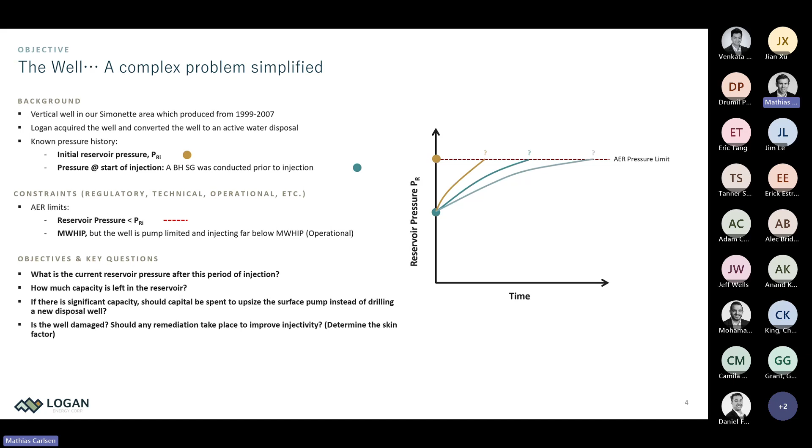So ultimately, we want to see which curve we're on and how much capacity we have in this well. The workflow that we'll take is, number one, a production history match. This well has production history, so we can analyze the reservoir parameters, conduct normal conventional RTA, and lock some of the inputs for disposal modeling. In this case, we can determine the reservoir extent. Step two is building out the initial disposal model using Whitson. This will give us initial estimates for modeled reservoir pressure and skin, and provide us a forecast. It's going to tell us initially where we think we stand with this model.

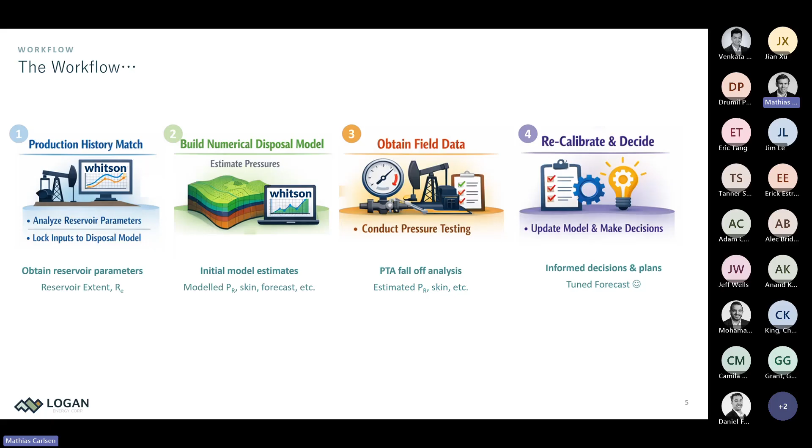Step three, we can obtain field data. We can conduct pressure testing, do an injection fall-off test, and conduct some PTA to actually get estimated reservoir pressures, skin, etc., which we can use as input into step four, a recalibration of the model to generate a tuned forecast to ultimately make decisions off of.

So starting with step one, production history match. So this well produced from 1999 to 2007. That's the history there. And you can just step through your standard RTA process. In this case, you can see on the type curve plot there, the production history was in boundary dominated flow, and you can identify the flow regimes there too.

And from those stems, you can also identify the dimensionless reservoir radius and back out your reservoir extent. But I find that looking at those stems is quite subjective, so you can step through the typical RTA process, do your flowing material balance. In this case, it's a nice straight line for your 8 BCF of SRV. And then you can use that and history match that well and actually back out about 600 meters of reservoir extent, just stepping through your typical RTA process on your production history.

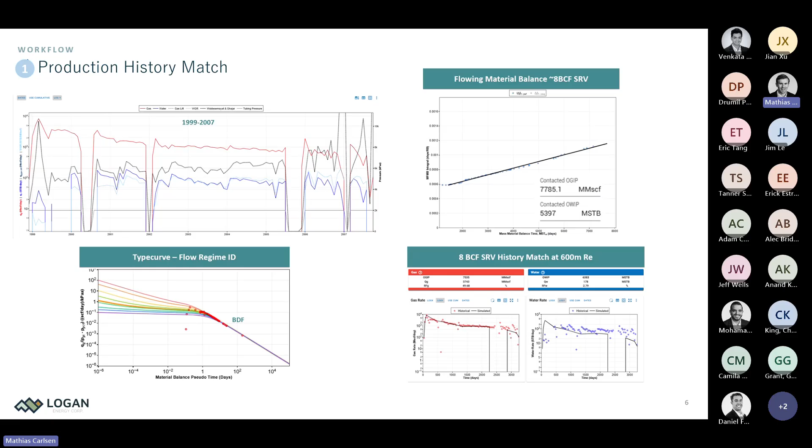Step 2, this is going through the initial water injection history match, so using Whitson on your actual disposal history. So we're going to make a match on the water injection rates and try and match bottom hole pressures. And in this case, we're using that reservoir extent as a history matching parameter. And you can see that stepping from a larger reservoir down to 600 meters gives us a better match on the bottom hole pressures. And that lines up with what we actually saw from our production RTA.

So from this, we can use that model and create a forecast. In this case, you can see the bottom hole pressures in black. They've been constantly rising, so we can forecast that to what we predict to be our maximum wellhead injection pressure. And on that dotted gray line, you can see we've matched the initial reservoir pressure that we got from the start of injection, and we now have an estimate for the modeled reservoir pressure.

So we have a modeled reservoir pressure, we have an injection forecast, but in this case, at the time, Whitson only allowed for 100% water saturation. So we do know that there may be some limitations in this specific model. So Whitson has since added additional functionality for skin and Sg input. But for now, we know that this is just 100% Sw in this reservoir.

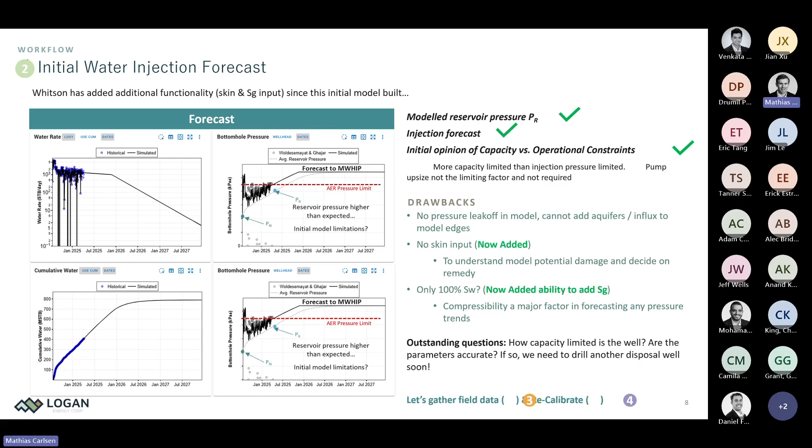So what we did in step 3 was conduct an injection fall-off test in this well and conducted PTA on this well. This was done in external reservoir software. However, as Mathias has mentioned, the injection fall-off analysis is coming soon to Whitson Plus. So here, standard PTA, you can see wellbore storage early on, and we do have radial flow by the end of the test. Using the radial flow equations and a pressure extrapolation, you can see that we are able to obtain an estimate of reservoir pressure, estimated skin, and estimated permeability.

So some of the observations so far from conducting an actual field test are we have observed that we have more capacity or injectivity than initially modeled. In other words, the reservoir pressure from the fall-off is lower than our modeled reservoir pressure in step 2. And that's possibly due to the lack of gas saturation input from the previous model. And so we have significantly more capacity at this reservoir pressure below that AER limit.

We also have an idea of skin. So this well is properly stimulated and not damaged. It has a skin factor of -4. So it helps rule out remediation for near wellbore damage. So we've learned quite a bit from this analysis already.

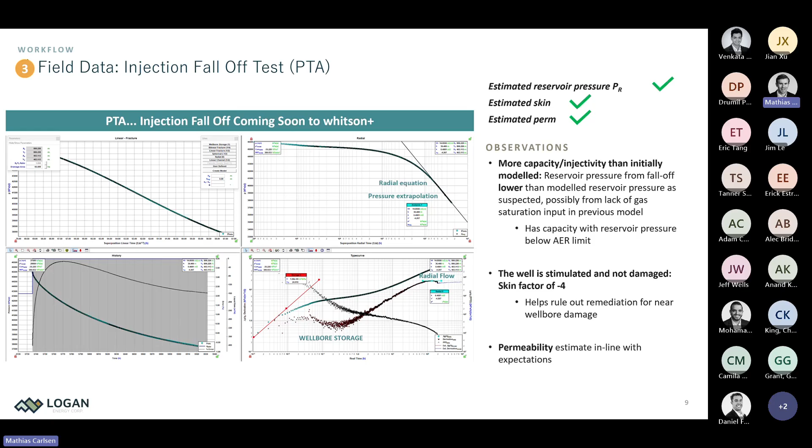And then as for permeability, permeability estimates are in line with expectations. So just something to adjust for when retuning models. So with all of this information, we can bring all of this to step 4, which is recalibration of the model. So for this retuned model, Whitson actually added some feature additions. So I was able to add in the skin and gas saturation here. And so that just improves the model to better fit the physical conditions.

So some of the new inputs that we have are the reservoir pressure from the model match and the negative skin input. So on the bottom, you can see the updated history match with the fall off. That blue point is matching that reservoir pressure obtained from the fall off analysis. And now you can see that there's significantly more room for the reservoir pressure for injection.

So overall, because of these inputs on reservoir pressure and skin, it's improved the confidence in the model. And the results show there's additional capacity compared to the initial results. But still, it shows that the technical limits still outweigh the operational limits. So looking at the plot here, it does still show that the reservoir pressure is climbing more than the limits on the surface for upsizing a pump. So no need to spend capital on upsizing a pump.

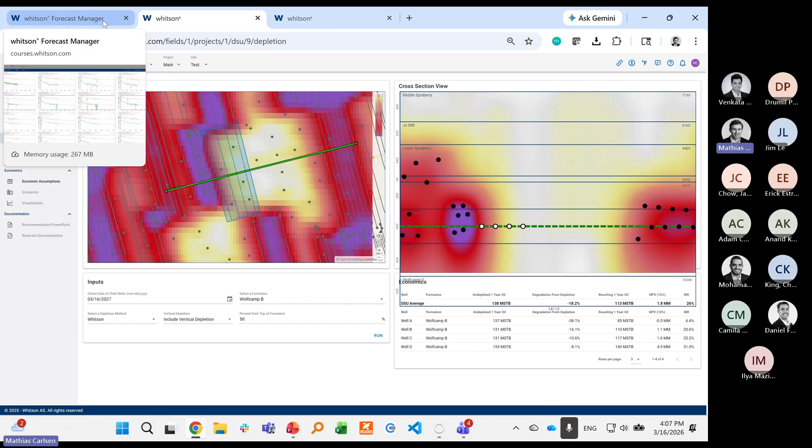Good. Make sure everybody's back for this. Yeah. We've got 2 more minutes. I don't want them to miss anything in the beginning. This looks fancy. But good. It's been a good turnout. Yeah. I kind of thought this was decently smaller than WhitCon. WhitCon's obviously bigger, but it's a good show up here. It's over 100 people. Yep. So that's not just a third of a WhitCon.

So you're doing a Whitson Europe one? Now it's got to be maybe up to 40 people. Okay. It's like WhitCanada was a few years ago. It's hard to do it big when you don't have that many clients. Now we have so many clients. Makes sense. Start small. We'll have to give Daniel a hard time for showing some harmony plots there, though. Yeah, he did it on purpose. It's okay. He actually asked if we could get it in before, so he could add those plots. Good. Yeah, let's do that.

Okay, we are gonna get started again. This is the last session before happy hour. Maybe if I sing, people will hear. Maybe a Norwegian song, people will be terrified and leave. Will, Graham, my dear friends in the back, Mr. Rose. Well, he has a good last name, but maybe it's not loud enough. Okay. The problem with me is that I only have one joke. I need to increase my vocabulary. It's hard to be Norwegian in the States, I tell you. You're not good in Norwegian anymore, and you're not good in English, and you just end up with something in between. Beautiful.

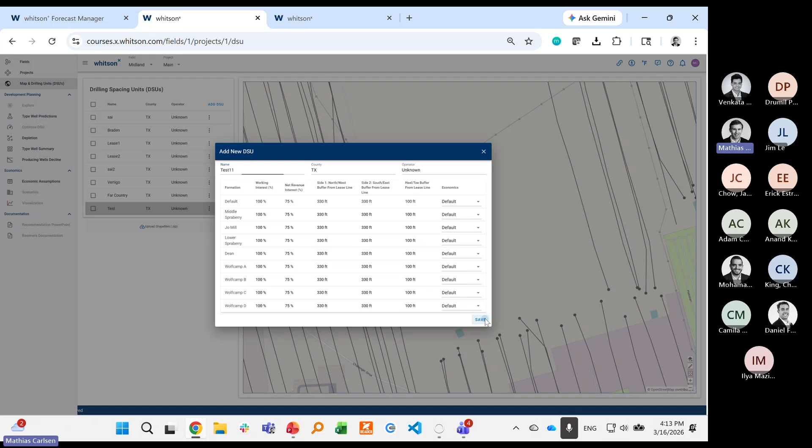So it's going to be running full economics. We have the American economics, but Ryan's actually just working on the Canadian economics as well. So we'll have both there very shortly. And once we've created this DSU, we can come into the type well prediction model here.

So we've taken a look at all of the existing wells in the whole basin, and we've trained a neural network to try to predict well performance given all the things that go in. So changes in lateral length, changes in well spacing, frac size. How do these correlate to both the 1-year cum as well as the EUR? So it's the neural network's job to learn how changes in well spacing affect both of those, how changes in frac size, lateral length, etc., drive those well results.

So it's going to run it through that trained neural network to give us a prediction for both 1-year cum and oil EUR, and then take the decline shape of the surrounding wells. So we do a 3-segment hyperbolic on all the wells, take the shape of those, but the volumes predicted by the neural network here to draw the type curve in green. So it's kind of neat. You have a tool that is dynamic to the exact spacing. You can change the frac size, see how that impacts the type curve here.

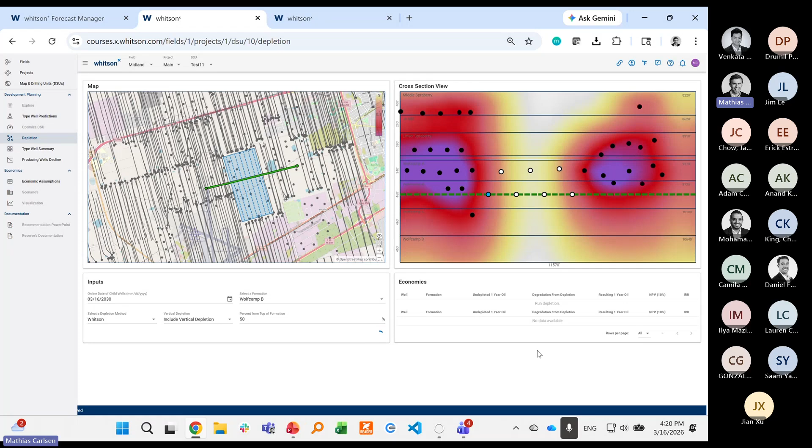So you can model, are certain leases more sensitive to waiting with time? If we wait, do certain locations become uneconomic? You can then optimize with the drill schedule to account for not only just the depletion for each well, but if we change time, how does that change the depletion?

And again, this was a big pain point in a prior life at Apache. We'd have a drill schedule and then they'd say, well, what would the depletion be like for that? It was a lot of time, a lot of guessing, a lot of rules of thumb for trying to come up with those depletion numbers. Hey, we're actually going to drop some rigs. What's the depletion look like now? Forget it. Just keep your depletion that we had before. This gives you a way to actually have those numbers and be able to optimize around that.

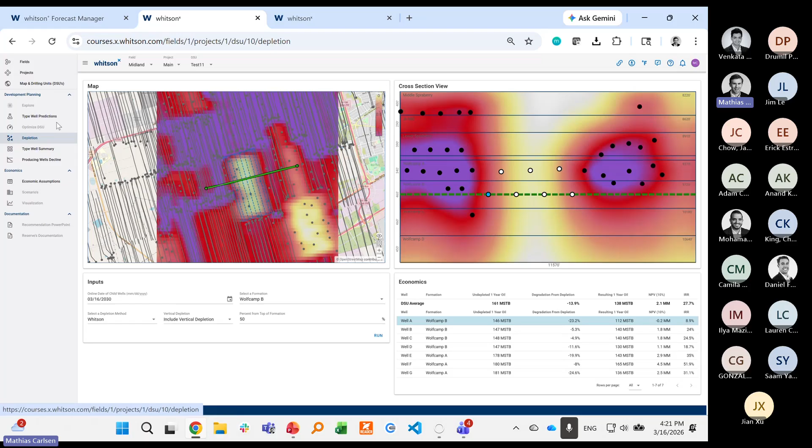So the last piece I'll touch on here before we open it up for questions is we also have a capital model built in here. So when you change the frac size, say in this case, it was predicting the drilling costs at 3 million, the completion costs at 3.9 million. If I make this a smaller frac here, it's going to change that 3.9 million to something lower because I'm doing a smaller frac. So the 3.9 million is going to become 2.5.

It's also going to change the type curve there. So you're dynamically changing both the production side as well as the capital, and we can in live time see the resulting economics here. And it's designed so that you could come in and have your own price files, your own capital model. So if a certain well at a certain frac size costs that much, you can easily tune that to reflect your own costs to run those economics very quickly and easily live there.

And then the next step after this is to be able to run hundreds or thousands of permutations through and see those trade-offs at different well spacings, at different frac sizes: what are those optimals, or what is that incremental capital versus incremental NPV, to help make a decision on that lease optimization problem.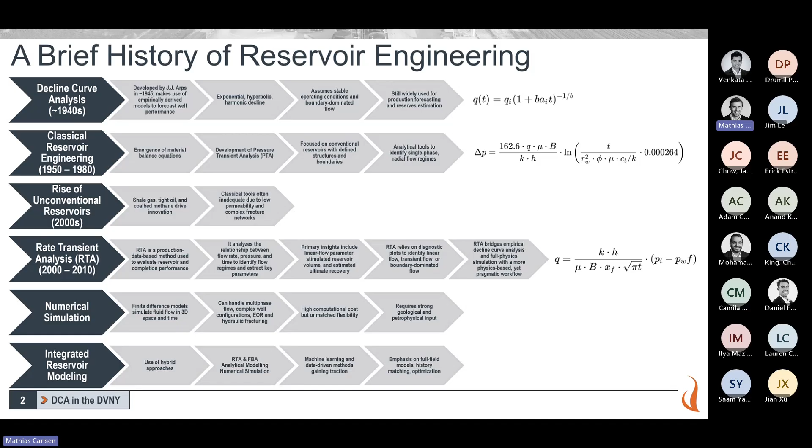So moving forward, anybody recognize this gangster? Mr. Arps himself, the original gangster. What he developed back in 1945, we still use today. It doesn't matter if you're in a conventional basin, unconventional, SEC regs, or north of the border, NI 51-101, we're all using the Arps equation. How valid is it? Well, for conventional, probably directionally consistent results across the board.

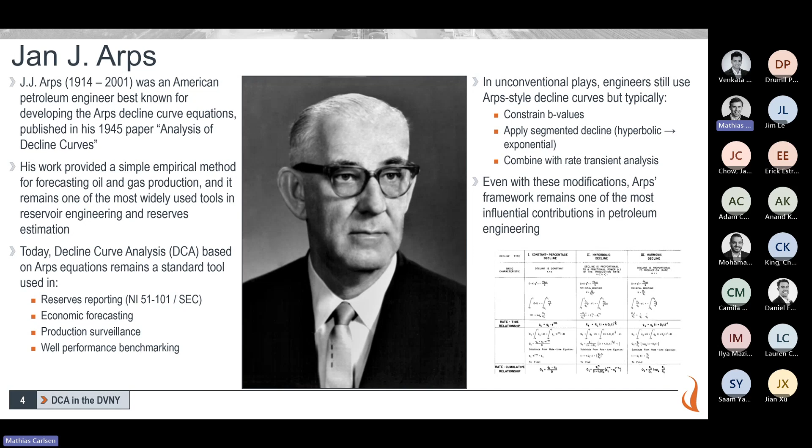Where this falls apart is in the unconventional, because if you recall, back in the day almost every single well hit boundary-dominated flow really quickly. You had an extended period. You could draw your lines through that, no problem. When you've got a high degree of curvature with an unconventional well, that falls apart really, really quickly. So we've come up with some constraints, some workarounds, some rules of thumb, etc.

So just a little bit more background. I think I covered probably most of this extent, like in the unconventionals, extended transient. So what does the b value actually represent? It defines the curvature of your Arps decline.

And you can see on the bottom right plot, we originally started those values really low, 0 to 0.3 for oil, and then progressively getting higher and higher until you get to shale oil, 0.7 to 1.3, and shale gas, even higher than that. I'm not sure if CBM is still a thing, but it's there anyway.

So how did I tackle this? Well, the first thing I did was I exported all the production data out of EVA. So EVA's a front for data. It's fed with information out of GDC Data Hub, Petrinex, so it's a public data source.

Exported it all from there, put it into Whitson, and I thought, okay, how the hell am I going to deal with 1,800 wells? I have done that level of DCA work before, and carpal tunnel is the result from that. So I loaded it all in, and then noticed, you can see the comparison plot on the right, the scatter in the data, there's a fair bit of noise in there. So what I did was I filtered down to anything over 18 months worth of production, and that dropped the number down to just shy of 1,500.

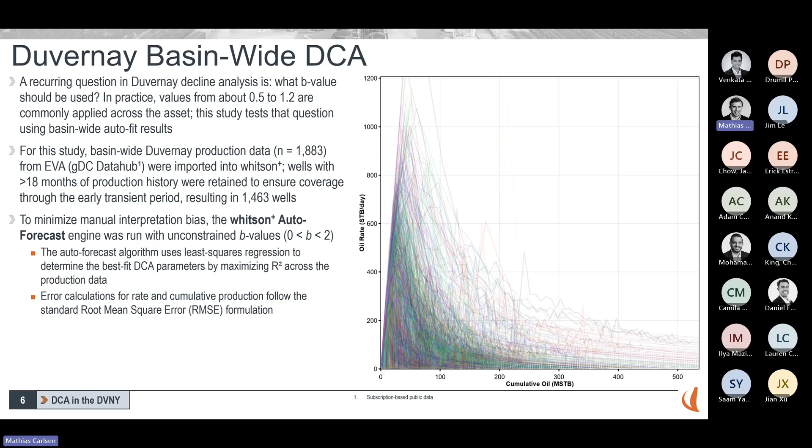And then where did I end up? Well, I swiped some of this information from a LinkedIn post that Mathias did not that long ago. So this is known as the Anscombe's. Is that saying that right? Anscombe? She's Belgian.

So this is the problem with letting the machine do all the work. It's not purely any sort of AI, it's all statistics based. And if you look at those 4 plots on the bottom, they've all got the exact same correlation, the exact same R squared, but fundamentally different scatter on that data.

So I absolutely embrace the machine. I use this almost daily in general, AI, machine learning, etc., but you can't let this thing run your life. Okay, you have to have eyeballs on it. And that's the point that Mathias made on the bottom right corner there. Always plot your data. It's the only way.

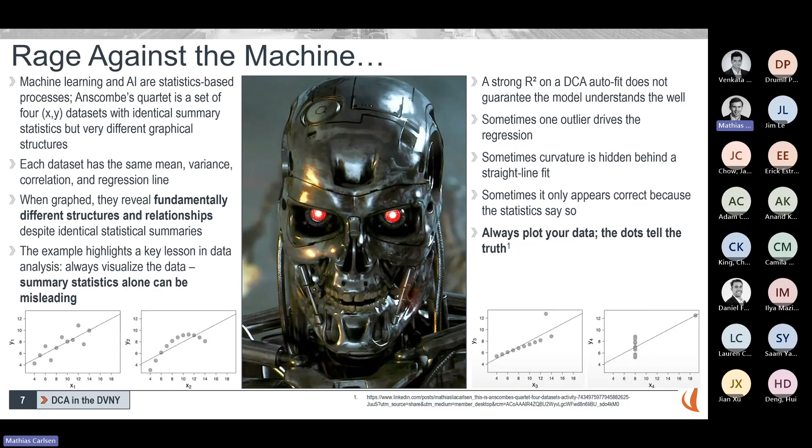Next part. So this is where the meat and the machine come together. The background plots there are, again, straight out of Whitson. Started clicking through these. How does that fit look with these two eyeballs right here? So case in point right here, and I didn't go through all of them. I'm still grinding through it. It's 1,500 wells, so it's a bit of a workflow. But in general, the fits are all really good after I filtered down.

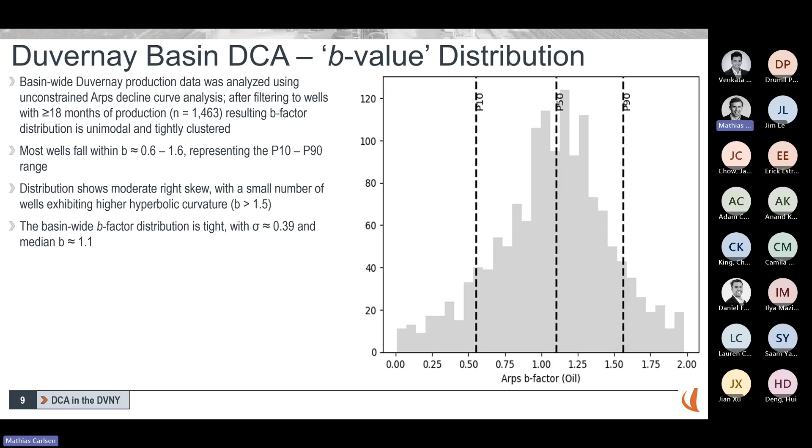So what does that mean? Well, first off, I just looked at the distribution of the entire data set. So we got a P10, P90 ratio. So that's giving us everything between 0.6 to 1.6. So pretty low, pretty high. Sigma, so standard deviation, pretty tight on that. And the P50 b value is 1.1. It's like, okay, well, that kind of grounds the number that I've been using, grounds the number our reserve auditor has been using. But what actually impacts this?

So the next two sensitivities were how b value changes with respect to net pay, or sorry, gross pay. And then on the next chart, we'll see how it affects maturity, so the phase window. So the proxy for this was just gross pay. It varies quite a bit in the Duvernay, north of 40 meters up in Kaybob. Teine is roughly 20 meters. And you can see some lower, thinner stuff as you get into the East Shale Basin too.

Sorry, oh, gave it away. I broke it. Okay, back to here. All right.

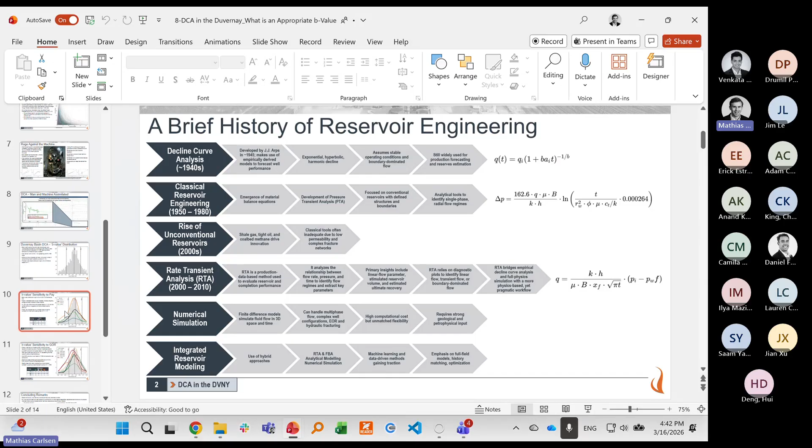Just a few concluding remarks. So in general, despite Arps being super simple, it has absolutely stood the test of time. It has matured remarkably well. For unconventional reservoirs, I think you need to be cautious with it. You can't just go applying numbers willy-nilly. You need to put some thought behind it. What flow regime are we in?

I use RTA almost exclusively to ground all of our regular DCA plots, going through reserves, etc. RTA is the go-to tool that I use. So thank you, Mathias. Thank you, Oxy, for that one.

The basin-wide Duvernay wells are all roughly around 1.1. But like I said, I did filter that initial data set to make sure that I've got enough early time data to deal with that early time transient. And without a doubt, you can't eliminate the engineering judgment. So I've already said thickness, maturity, relatively insensitive.

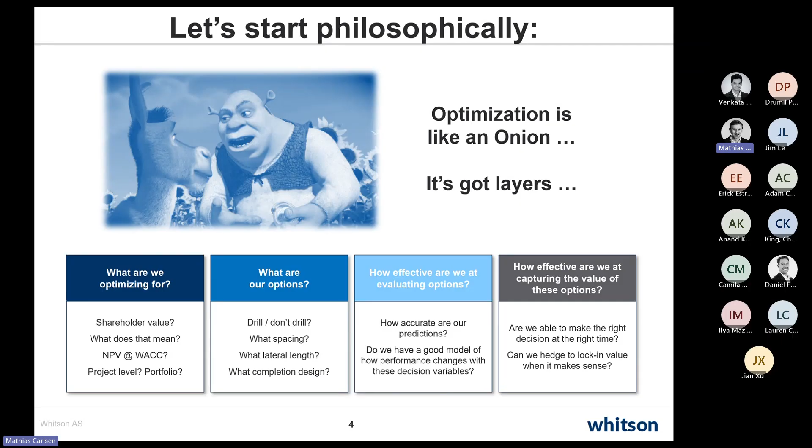For today's talk, I'll work through a simple example, simple question, complex solution, that most of the folks in this room are probably fairly familiar with, which is, suppose you're given an undeveloped or partially undeveloped land base. For example, this might look slightly Montney-esque to somebody, the data is synthetic but follows the same kind of trends. So your company's got 38,000 acres in an unconventional play that's partially undeveloped. You've got multiple fluid windows spanning from dry gas to volatile oil.

And then, thanks to your well-calibrated neural network, wink, wink, you have robust predictions of how well performance is going to degrade as a function of well spacing, as well as other factors. Corporate's going to release funding for a development program of up to 24 wells per section. You don't have to spend it all if you don't want to. And then the question is, what is the value of this land position?

So you might start off deterministically, as one typically does. You might come up with some sort of economic tiering map where we're finding, in this case, just running it flat at 75 CAD oil and $3 AECO, you might find that this volatile oil window is looking fairly economic, but dry gas not so much, liquids rich gas, and then up dip on some of the more normally pressured higher water cut stuff, again not looking so great. So we look at it and we found at the base pricing only 31 of our 60 DSUs are even economic.

And here just quick side note, using PI ratio, if you're not on board, it's kind of nice, less squirrely, there's no multiple PIs, but there are multiple IRRs. So it's a nice way of looking at things at a first pass.

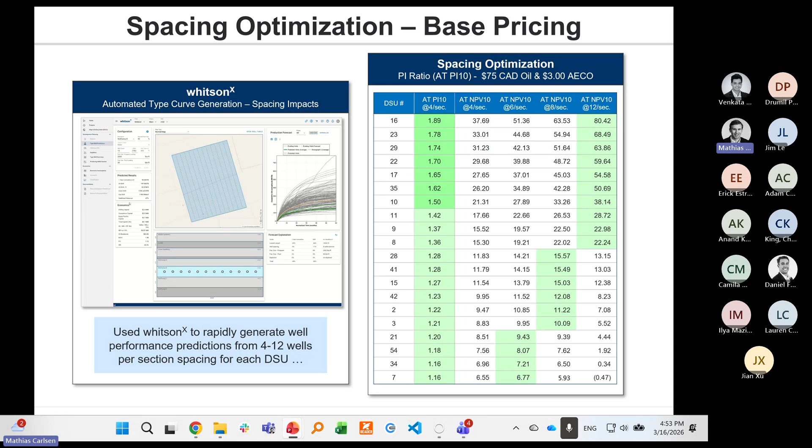So, like I say, with optimization, anytime you think you know something, let's unpeel a layer of the onion. So should we drill all 10 of those DSUs at our highest 12 wells per section? Maybe, it depends. Are you optimizing your DSU level economics, or are you trying to optimize your project level economics? And if you want to go one layer deeper, are you actually optimizing corporate portfolio economics?

So as spacing gets tighter, as everybody knows, marginal incremental returns are going to go lower and lower. It's a diminishing returns thing, because at best, your next well that you squeeze in is going to produce the same amount of oil or gas that the previous well did. At worst, it might be a little bit less, could be substantially less. And since we're capital constrained, as we often are in life, is it better to drill your best DSU at 12 wells per section, or do you want to drill your top 2 at 6 wells per section each? So you can play around with those permutations, because every time you decide to add incremental wells to your top DSU, you're pushing out inventory in time, and that's got a time value of money impact.

So to do this, quick simulation algorithm. I'm not saying this is optimum. It's just one of the cool things that you can do when you plug yourself into the whitsonX matrix and have access to that full prediction all the way through economics workflow in one place.

So we calculate DSU economics for all the spacing and timing options, then rank them based on, for your year one, what are your top DSUs based on PI ratio? Create budget year spacing options subject to that 24 well constraint. So do you want to drill two 12s, or four 6s, or six 4s? Calculate the economics for that, but then also recompute what your drilling schedule is going to look like for the rest of the development program. Compare full project NPVs, not year one, not DSU one, but full project NPVs across all of those. Lock yourself down, drill some wells, and step forward to the next time step in the simulation.

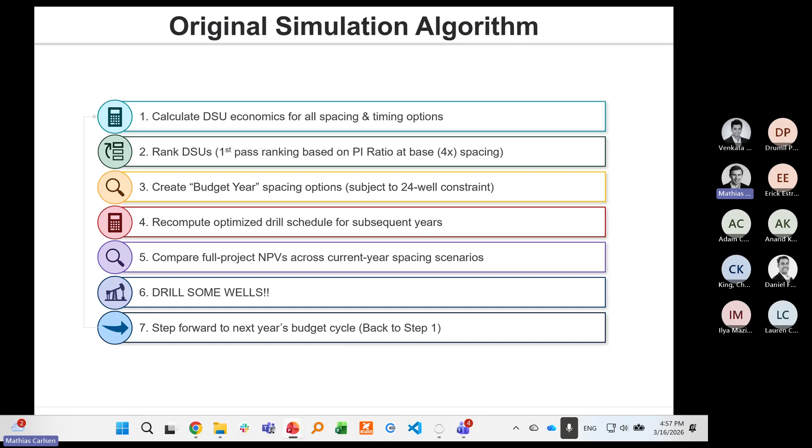And to make matters more complicated, as Mr. Trump and everybody have shown us, pricing is super volatile, even more so than we sometimes remember. So let's take this original simulation algorithm and let's Monte Carlo pricing. So instead of just going straight through to your budget year economics and setting your synthetic budget, let's try to simulate what pricing is going to look like at each step of the Monte Carlo, and then lock in hedges, make your decision, and drill some wells, hopefully profit.

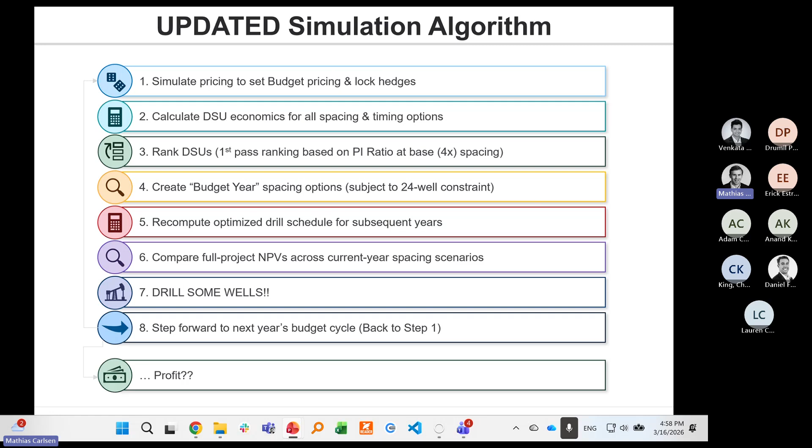So you can see that oftentimes the back end of the forward curve tends to converge on long-term pricing. And although pricing in any given day, in any given month, in any given budget year is fluctuating quite a bit, it tends to have this behavior of converging on a long-term equilibrium, long-term supply-demand based price.

So what that means for us is if I just want to simplify this problem a little bit to the point where I can actually simulate this, let's roll the dice on AECO and let's roll the dice on crude oil and condensate pricing in Canada every year for budget. And then let's basically impute a synthetic forward curve to say that long term we're expecting $75 and $3, but in any given year might be $1.50, might be $4.50 a GJ, might be 55, might be $95 a barrel.

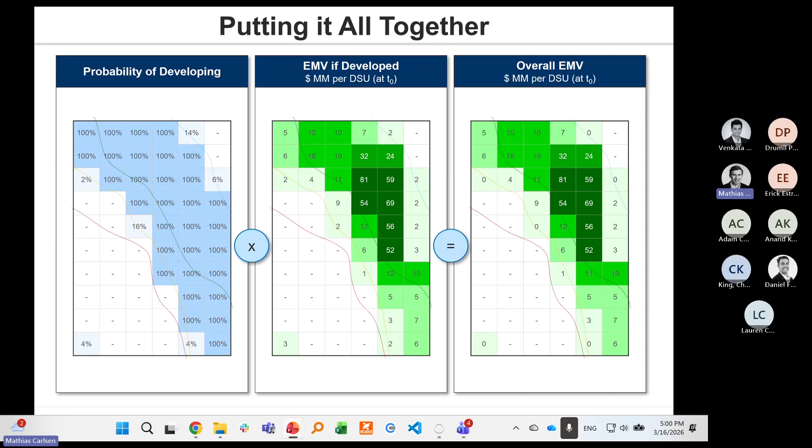So you can see on the left-hand side here, we found that the Monte Carlo simulation picked to drill most of the DSUs 100% of the time. Some of the fringier stuff, especially on some of the higher water cut and liquids-rich gas, came in at 2%, 16%, 4% of the time. And then you can multiply that with the middle map, which is the expected value, so average NPV across all of the iterations where it was drilled, to generate a risked NPV per section map.

Another way to look at it is also doing this kind of similar stochastic version of this cum NPV versus time chart. And you can see that in our Monte Carlo simulation, we found expected NPV was $488 million with a P90 of 368, P10 of 609. What was kind of interesting was, how does that compare to our deterministic case?

And it's actually lower. So some of you who kind of get nerdy about option theory, stuff like that, aren't options supposed to have value? Like, why isn't this higher than the deterministic case? And where I think I landed on this one was, although the option has value, volatility also has a cost because you're starting with finite, like fixed inventory.

And it's really like fundamentally the same reason that our parents or grandparents and retirees don't just YOLO it on stocks, like they have bonds in their portfolio as well. Because when you're burning through inventory at the low pricing, it really costs you a ton. So you shouldn't be comparing the blue line to that gray line.

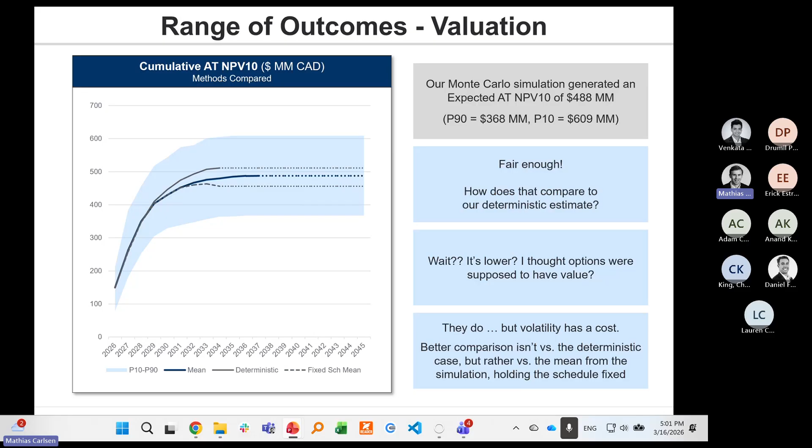You should be comparing it to this dotted gray line, which is if you take the schedule that you determined deterministically, but still Monte Carlo the pricing, what is the expected value from that? So in that case, we do kind of see the anticipated behavior.

So I went through that fast to try to get people out to happy hour. But the point I wanted to make was there's a lot of onions here and there's a lot of layers. With apologies to Mathias and Braden, I think Whitson has previously been compared to a Formula One state-of-the-art race car. I'm going to compare it to the infamous Slap Chop.

At this point, I'm fairly convinced that I've lost all of the interns and EITs in the room. For those who haven't seen this infomercial, I highly recommend going to YouTube and trying to rewatch it. As a further aside, this guy's a little bit nuts. He ended up in jail. I think he ran for the Republican primaries in Texas. But anyway, I digress.

So there's a bunch of onions out there. There's a bunch of layers to all of those onions. And with tools that start capturing more and more of that integrated workflow, this becomes something that you can actually use to dynamically optimize all these things, test different development strategies, test different business strategies, and start looking at things like the effects of depletion, the effects of 3D spacing and interference.

If you really want to make your head hurt, start looking at the global portfolio like my previous job. So anyway, we hope we are building kind of a more useful tool to chop through some onions. And with that, I'll hand it over to quick questions.

Thanks very much. And with onions, you'll always use glasses, else you start to cry. Question? In order to do economics, some companies and individuals make careers out of them, so they're a little complicated sometimes. Can you discuss your economic engine and your assumptions? For instance, royalties are rate dependent. Higher rate wells will have different royalties.